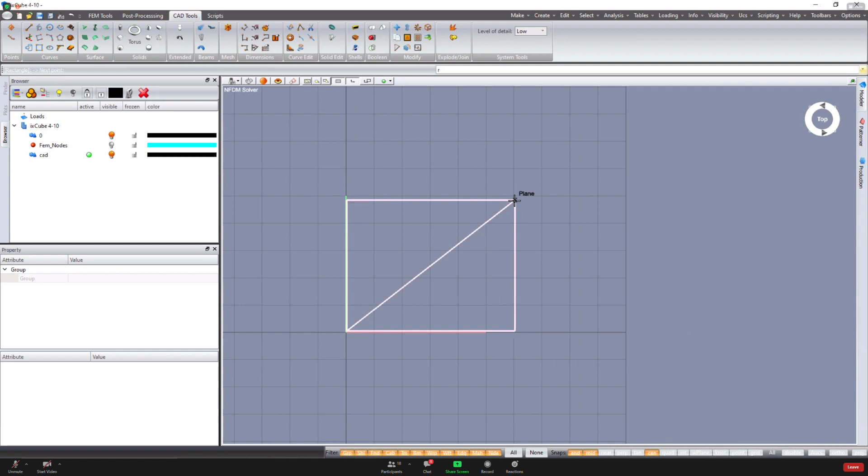From corners, I just click somewhere here, and then if you want exact dimensions, you can input here in the prompt, for relative, let's say 10,10. So we have made the square 10 meters by 10 meters. Now I want to fill this with a mesh. So you select this square. In the FEM tools, we have this tool here called Swan Merge.

Swan Merge wants a number of boundary polylines or boundary lines, and working in the current UCS plane, so I am looking from top, he will fill it with a mesh. So we call Swan Merge. It's asking me the size of the mesh. So we have a mesh of 10 meters by 10 meters. One by one, we make a mesh 1 meter by 1 meter. You close with OK, and it generates this mesh here.

Now, maybe 1 meter by 1 meter is too big. So we could use the remesh tool if you want to change the mesh sizes. And I want it to be 0.3 by 0.3. So we have changed the mesh size. So we have just a flat mesh here. And now we want to generate an inflatable out of this mesh.

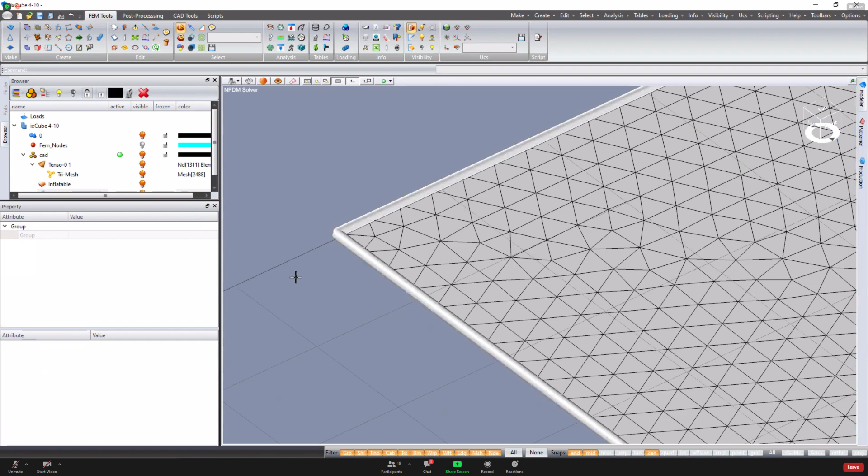Now, we double click on the edges. These edges are beam elements. They are linear behavior. And then we put them fixed. Fixed means I'm not really interested in the structural behavior. I just want to fix the membrane on these edges. You can input the cross section just to not let the software complain that they have no cross section. So we have generated the edges of this mesh. Now we want to inflate it.

Before inflating it, this is quite a big membrane. Later, I want to make a double layer, like a cushion. For this reason, I will double click on the membrane, and I am using now Ctrl+C to copy. So I have made a copy of this mesh. Okay. First of all, we want that this mesh, this membrane, becomes a layer of the inflatable. So you just drag and drop over the inflatable. You see now that the tensor group is child of this inflatable.

If we right click on the inflatable and we go into tensor params, we see that the inflatable has detected one chamber. And for this chamber, we have the pressure inside the chamber. In this case, it's 0.25. Remember that we are using kilonewtons and meters. So this is 0.25 kilonewtons per square meter. Okay, this is a pressure.

So, okay, let me save this. If you do not save your file, you will not be able to run form finding or analysis, for the simple reason that the software generates a number of scratch files, and he needs to know where to save these files. Okay, so we have saved it. Now we have an internal pressure inside this inflatable.

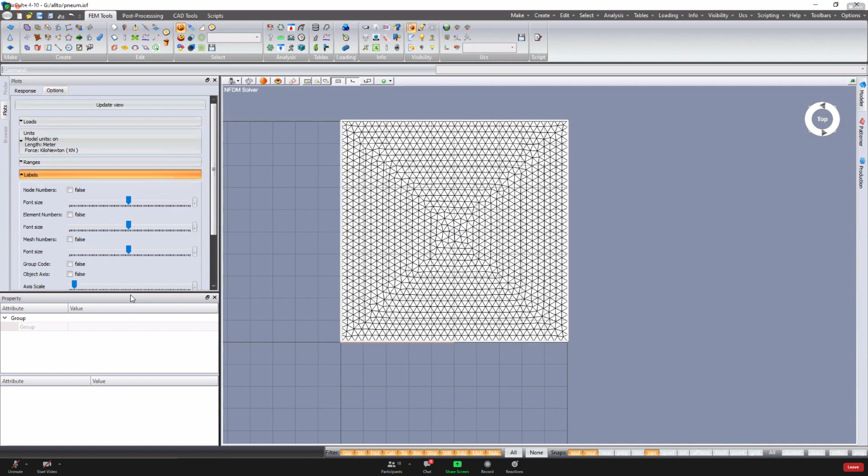Let's say that we want to see now which is the warp and weft plane. We want to check it. You can go into Plots, Options, Labels, and here we have the object axis. Activating the object axis, let's make them smaller. Okay, you see these axes here, and we see 3 arrows, one red, one green, and one blue. It's easy to remember: RGB is the color for monitors. Red, green, blue, RGB, X, Y, Z, warp, weft, and normal vector. So red is the warp direction, green is the weft direction. And we see that we have assigned that this is warp and this is weft.

Okay, let's save. We are ready now, let me take off this. We can just recall the form finder. You see here that we have 2 form finding tools. One is called Form Find, and one is called Form Find Stiff. We will see the difference of these two in a few minutes. I will recall Form Find Stiff. It is asking me how many steps I want to run. 5 is okay. You just run 5 and say okay.

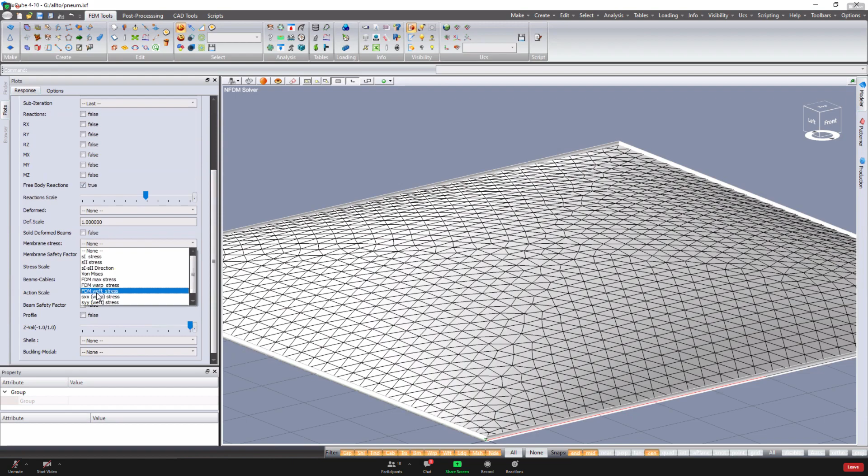And you see that the membrane has been inflated. Let's give a look in shaded mode. We see that it's inflated. And if we go into response, form finding, and we activate the membrane stresses for the warp direction, we don't see anything because the mesh is visible. You go in wireframe and you see the stresses in the membrane. Clearly, what we see is 3 kilonewtons per meter because we have set up that the mesh has a 3 kilonewtons per meter pre-stress. The same if we choose the Y stresses, again, a 3 kilonewtons per meter pre-stress on the membrane.

Okay. Jerry, can you maybe explain a bit, because you mentioned it's 0.25 kilonewton per square meter of internal pressure that you chose. Yes. And now you selected, instead of 1 and 1 for warp and weft, 3 and 3. So how do you select, and what is internal pressure? How much is needed for a cushion? I think this is important information for the students. Exactly. With inflatables,

I'm searching for the draw tools. So, okay, if this is an inflatable, a balloon. Oh, there is the arrow here. This is the internal pressure P. In any point of the inflatable, we have this pressure that is pushing the surface. Then in any point, let me change color here, in the membrane we have the pre-stress of the membrane. These vectors at each point, the pre-stress is tangent to the surface of the membrane. And this is the pre-stress of the membrane.

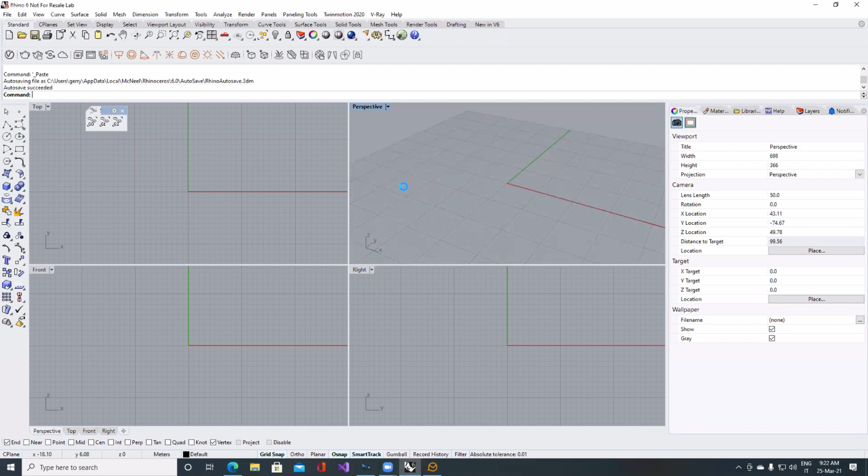Okay. I would like to measure the radius of this. I will get this mesh, Control C, Control V, and I'm in Rhino. Remember that if you're using Rhino 7, you have to go here, File, Export, CAD, and you choose here Rhino. It will save as a Rhino 6 file. If you're using Rhino 6, you can do a Control C and Control V.

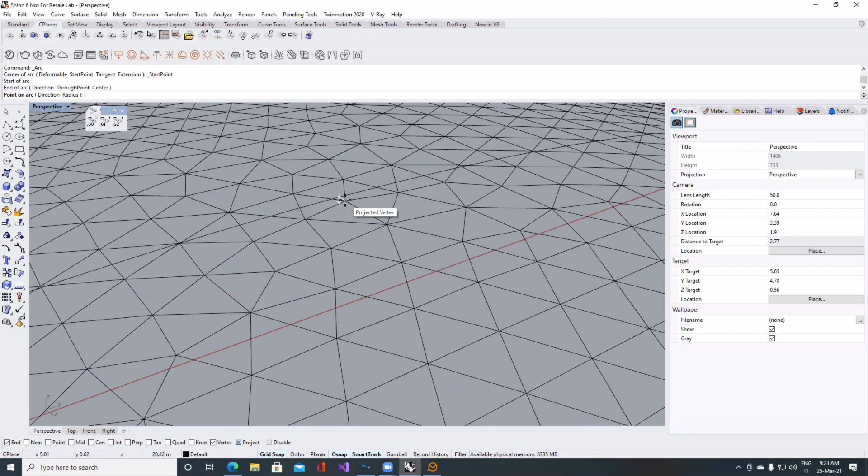I will join these. And now, we make a vertical plane, like that, and then we draw a circle from this point here, oh, no, sorry, an arc by 3 points, from this point here. This is an arc. If I go into the details, the radius is 20 meters. So 20 multiplied by 0.25, divided by 2, 2.5.

So I have calculated the pretension of the membrane, and it came out 2.5 because I used 20. It was a bit more than 20. Let's see. The radius is 20.42. So 20.42 is the radius. Multiplied by 0.25, the internal pressure, divided by 2 makes 2.55. There's something not really correct here, maybe I made a mistake.

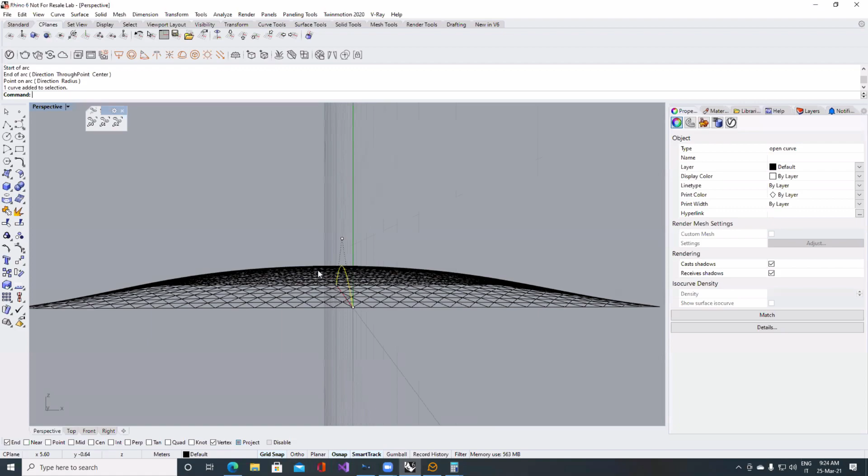.25 is okay. Maybe I didn't get the middle of this. Anyway, this is the formula. You can check it. This is a homework. You can check this if you do it correctly. Maybe I did not get exactly the center point of this. If you do it exactly, you should find that. No, sorry. Something that I forgot to say.

Again, the number of the pre-stress that we find depends, if you remember, on the number of iterations. So the more iterations we make, the more accurate we will get to the pre-stress. So I have used 5 iterations. Maybe if I use 10 and I run again, say plots. No, it's always 3. So we just found out that this is the correct value. So we should find out that this should be exactly 3 kilonewtons per meter prestress.

Okay, maybe this can be a check, your homework, check that this is correct. Maybe it's just a kind of approximation because 2.5 is kind of 3. So maybe you need to increase your... Yeah, but between 2.5 and 3, it's a big difference. I think I made more a mistake on the radius. Yeah, it might. Yeah, looked like, yes. But if you do it correctly, you should find that the balance is perfect. Okay, let's go ahead in any case.

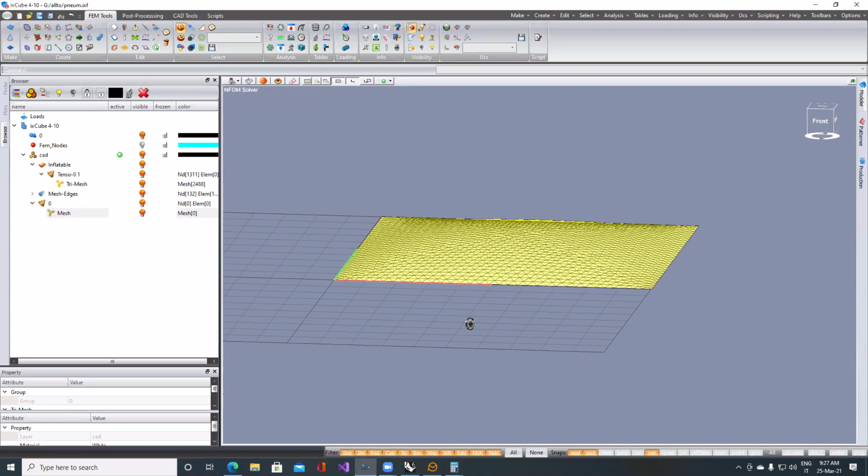Excuse me. I have a question. May I ask? Yes, sure, go ahead. I'm curious about the pressure number from the corner to the top of the shape. Shouldn't it differ from the corners to the center of the shape, or should it be equal in all parts?

This is what the software solved. If we look at the prestress, you see that there is very slightly, when you see these different colors, it means that these are not really the same. I mean, they're different at a certain point, but almost it's a constant pressure. The software has found out this. This is a minimal surface, a soap bubble. And the reason why we use these form finding methods is to find out a shape where the prestress is exactly, in this case, constant, so a minimal surface. Okay.

We see these slightly different colors, but since we are reading here 3.000, it means that here the value is not really 3.000, it's 3.00006 or something like that. That's why we see these slightly different colors. But here it's completely green. Yes. Thank you.

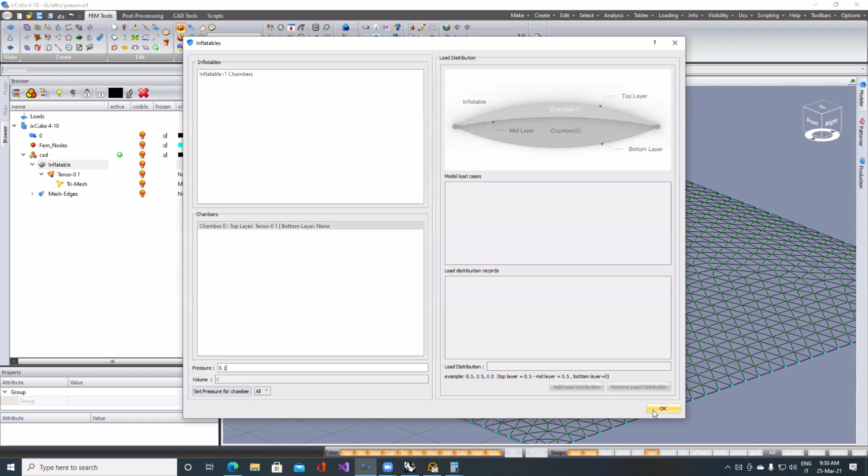So I need to copy something different. But we can do this. Look, I will make a trick. I will make a copy of this membrane, Ctrl+C. Now I am doing this for making a cushion. I will go into an inflatable and I will change the pretension to 0.1 and run the form finder. So you see, now it's flat.

Now, if I do Ctrl+V and I put my Tenso-Group inside, now I have 2 layers. They do not collapse anymore because I have moved the previous one. So now we have 2 layers. I will call this one here the bottom layer. And the new layer, I will call it the top layer. And I will just drag it inside the inflatable.

Now, if we go inside the inflatable, we see that they are not correct. The order of the layers has to go from the top to the bottom. So I get this one and drag it over the bottom, and we have inflatable top layer, bottom layer. Now, if I double click on the top layer, let's change the color to red so I understand.

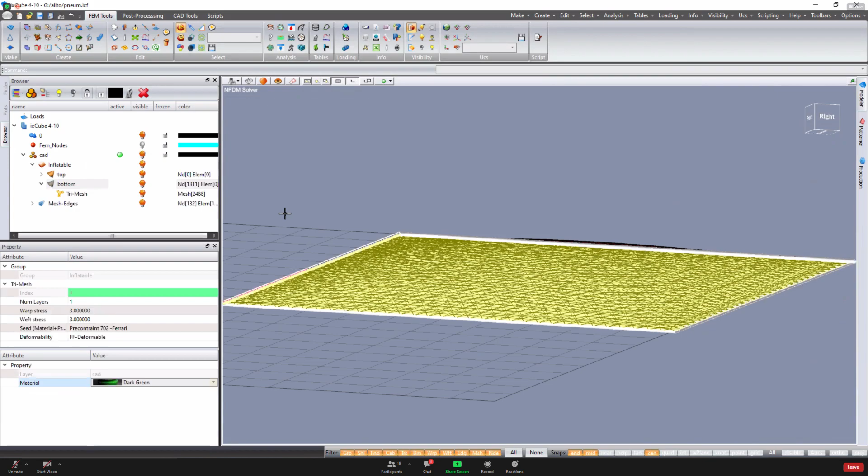I click on the bottom layer and I change the color to green. So, okay, I see that the top layer is red and I see it red from the top. But if I click on the bottom layer, it is transparent. When we see a mesh transparent, it means that this is the negative side of the mesh. A mesh has two sides, a positive side and a negative side. The positive side, you see it in the color. The negative side, you see it transparent.

So we need to flip the bottom mesh upside down. So I select it. Then here we have a tool, flip. I recall flip. Now I see it green. So red and green. Okay. I click on the mesh. This is 3x3 with a Precontraint. So that was the previous layer. Let's click on the top layer, and I will set this again. Precontraint. I will leave the pretension to 1x1.

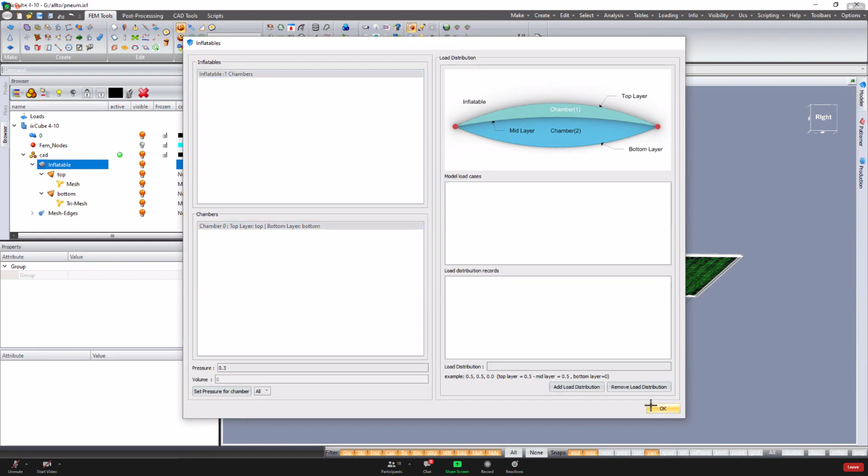Let's go to the inflatable now. Now the inflatable has one chamber, and the chamber is made out by the top layer and the bottom layer with a pretension of 0. Let's put 0.3. We run the form finder. That's it. Clearly, we see here that the bottom layer has a prestress of 3 kilonewtons per meter. So the curvature is quite lower than the top one, where we have set up a prestress of 1 kilonewton per meter. Okay.

So quite an ugly cushion, but this is how you can manage to change the curvature of one layer compared to the other one. Now let me change this to 2, and we run the form finder again. Okay, so this is a quite huge ETFE cushion. Clearly, if you want, you can add layers. If we want to add a middle layer, we can add a new layer.

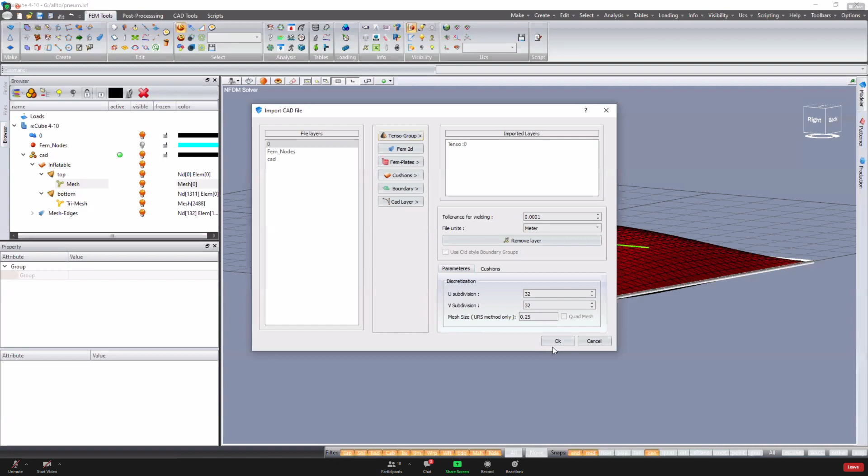Let's give it a try. If I Control V, we have the mesh inside 0, and I input it as a Tenso-Group. Okay. I will set this as the middle layer. If I run a form finding, clearly the middle layer is not inside the inflatable. So if I hide the inflatable, my middle layer is completely flat. No, that's why I run a form finding.

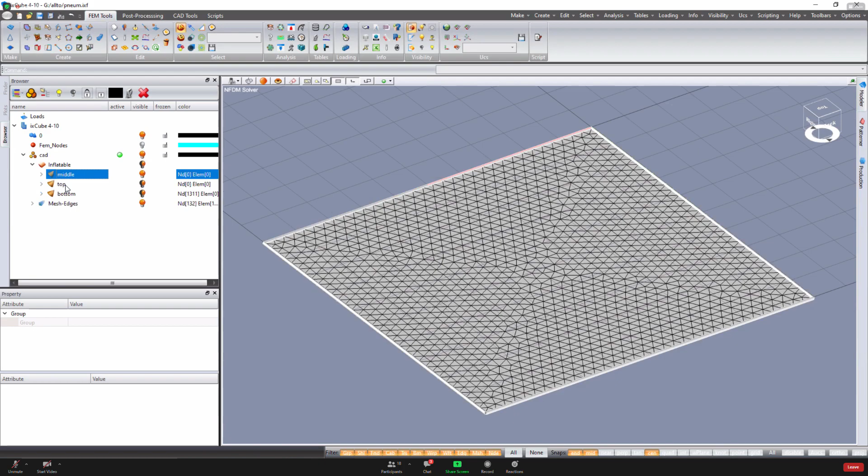Remember that for the internal pressure, only the inflatable applies pressure to the meshes. This mesh here, the one that I call middle, is outside the inflatable. So it has no pressure. Running the form finding, it just became flat. So it's a completely flat membrane because it has a pretension. Now I want to put this middle layer under the top layer. So I just drag it over the top layer. Like that. Okay. And now we have the inflatable, the top layer, the middle layer, and the bottom layer.

If we go into the params now, we see that we have 2 chambers. The top chamber, number 0: top layer is top, bottom layer is middle. Chamber number 1, the top layer is middle, and the bottom layer is bottom. Now, for the top layer, I input a prestress of 0.25 kilonewtons per meter. And for the bottom layer, I input a pre-stress of 0.35 kilonewtons per meter. Okay. So the bottom layer, this one here, we have input 0.35, and the top layer, this one here, 0.25.

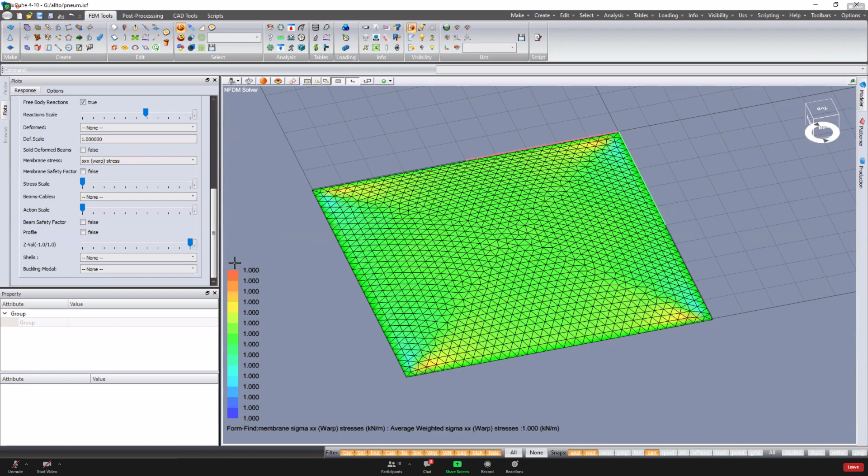We run the form finder. And we see that this is the middle layer. If I unhide everything here, we have 3 layers. If I hide the top layer, I can see the middle layer. And if I hide the bottom layer, let's give a look at the pre-stresses. So clearly, this is the middle layer, and it has a 1 kilonewton per meter pre-stress.

If I unhide the top layer and update view, the top layer, you see, it's 2 kilonewtons per meter. This is the middle layer. And then if we unhide the bottom layer, the bottom layer has 3 kilonewtons per meter. Yeah.

So this is generally how you never make an ETFE cushion: so big. This is 10 meters by 10 meters. Generally, there is a limit of 3 meters width. So if this should be a cushion, it will be 3 meters. You can make it 10 meters long, but the width should be not bigger than 2.5, 3 meters. Because generally for ETFE membrane, there's a limit in the pre-stress of 40 megapascal.

In this case, for ETFE, we use megapascal and not kilonewtons per meter anymore, because ETFE is not a woven material. And if you want to do this, you can go here into options and say, I want to see engineering stresses. In this case, if you set millimeters and Newton, these are megapascal. So Newton per square millimeter is equal to a megapascal.

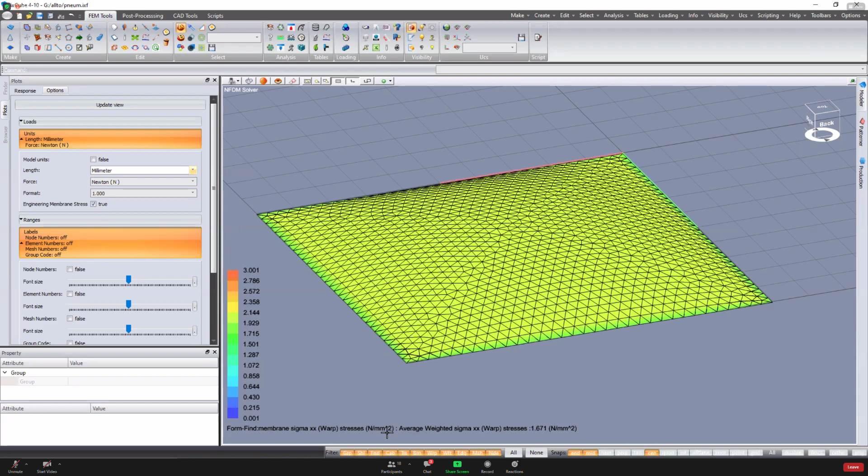So if you're reading a paper where you see megapascal as a pre-stress, you could choose this option, and you can see that we have 3 megapascal and 0.2 megapascal. Okay. Any questions? It's a bit tricky if you want to make an inflatable.

One thing that you should remember is the inflatable group, layers of the inflatable. The orientation of the layers is always facing on the top. So the top layer has to face outwards, and all the inner layers have to face in the direction of the top layer. The only one, the bottom layer, has to face outside. So the only one that is inverted is the bottom layer. The reason for this is that the software needs to know how to apply the internal pressure.

Okay. Hey, I just have one question. Can you hear me? Yes. So if you would have, say, a square base that would hold the cushion, however, the cushion fabric wouldn't be square, but would be several pieces sewed together, how would you proceed to find the shape that it would take under pressure? I'm thinking, for instance, of a sailboat.

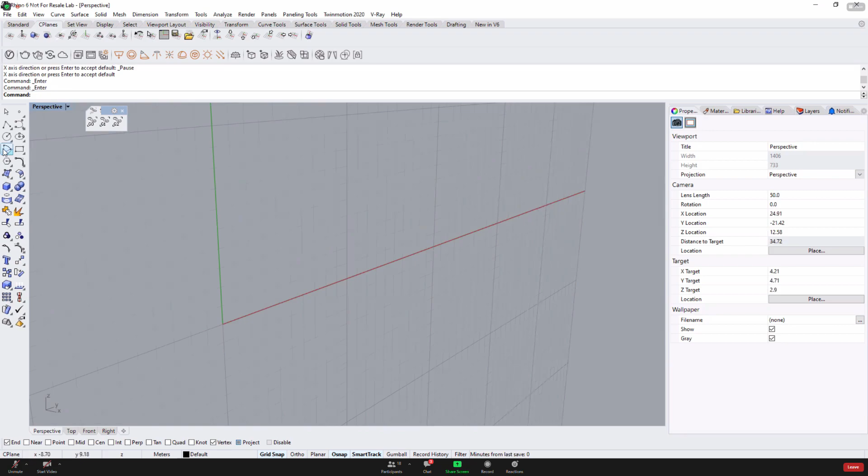Let's go in Rhino here. And let's make an inflated arch. So I will make a vertical plane, and I will draw an arch like that, and then go from top. Then I will copy this, let's say 3 meters. And now I will close it like that. So I want to make an inflatable over this one.

I get this, Control C, Control V, CAD layer, and here I am. Now I want to fill this with a membrane. I'll select everything. Remember, Swan merge. Let's make 0.25. So we have filled this membrane with the mesh. Remember that we need the edges. If I click on default, I will delete these. I don't need them anymore. Let's make the edges of this membrane with this one.

Apply. Can I interrupt you for one second? Yes. So my question, if we take this example: what if the base starting surface is not a straight loft between arch 1 and arch 2, but the surface is already bigger than the straight loft would be? So there is already some kind of sagging happening, and the sagging would then be taken care of by the pressure applied to that membrane. So you wouldn't start from a straight line.

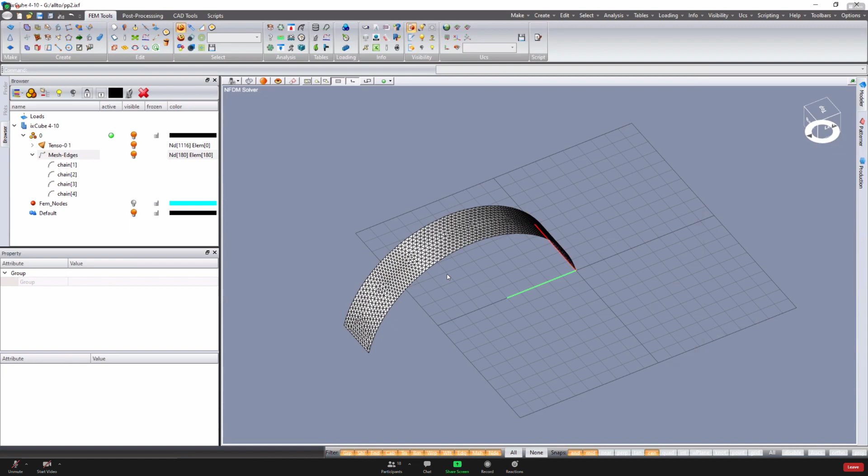It doesn't matter really. I think I understand your question, if I may. There's two things. The first one is, he inflates it, and it's kind of like a stretch material, like what you see. And later you do a cutting pattern to generate the 3D shape. Okay. Yes. Great. So I think I understood then. You cut the pieces so that in the end you receive the shape that you designed and simulated. So you can imagine the mesh as a slightly stretch material. Somehow, yes.

But for the form finding. However, the ETFE is not stretchable. So that's why you design it, and I'm sure that Jerry will show later how to do the cutting pattern. I think this was more your question. Yes, exactly. Thanks. You're welcome. So I didn't understand the question. No, I was thinking that I can start also with a deformed shape.

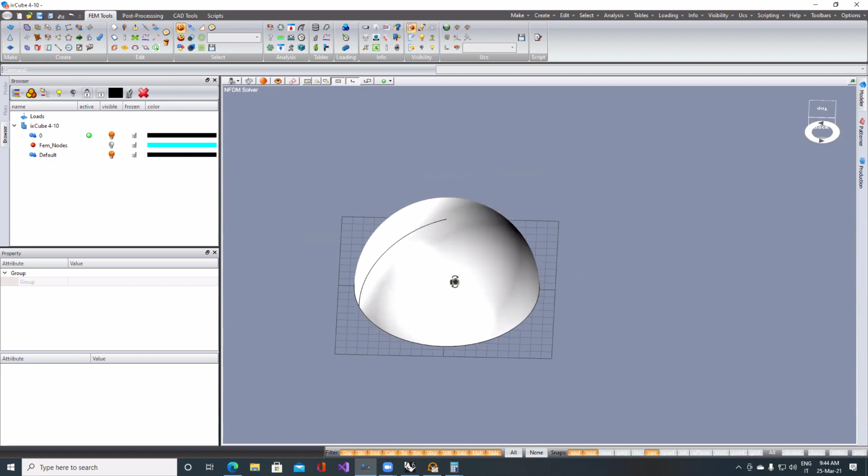Let's say that I want to use this dome here. With inflatables, there's a problem. I have this dome. We have seen what happens when running the form finding over an inflatable. Remember that we have the equilibrium formula, no? The equilibrium formula says, oh, let's make something different.

The equilibrium formula that I showed is the equilibrium between the pressure, the geometry, and the membrane prestress. Okay, so we have a formula that relates the geometry, the curvature, the radius, the pretension in the membrane, and the internal pressure. Now, what happens if I want to make something like this? This is interesting, it happens quite often in reality.

Let's say that I want this shape to be inflatable. This happens in reality. The customer comes and says, look, I want this shape here. Where is the problem? If I run the form finding, it's very difficult to find. Now, this is simple because it's a radius, but think of something more complex. I need to find the correct relationship between pre-stress, internal pressure, and geometry, because they're all related.

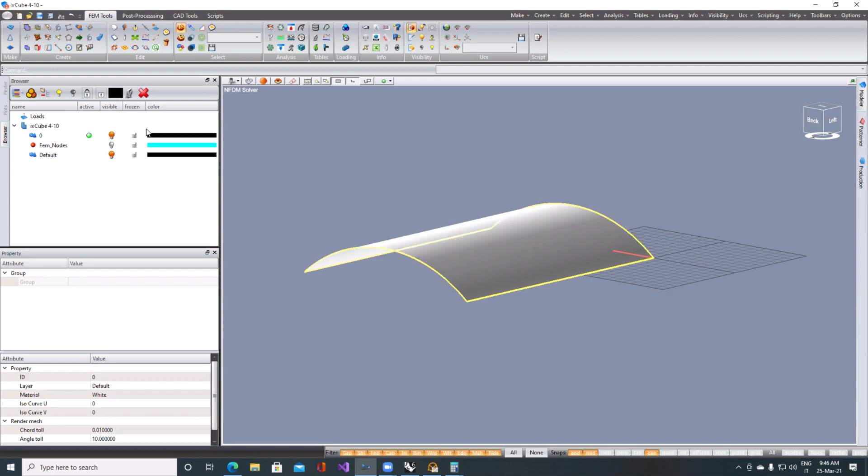What we can do is this. Out of this shape, I can generate a mesh. I go here and generate a new group. This is a surface, and I can say generate a mesh out of this surface. Okay. So I have generated my mesh. I don't need the surface anymore. And now again, we add an inflatable, and we put the membrane inside the inflatable.

Oh, I need the edges, so generate edges. I set these edges again to be beam, linear, fixed, just to fix the edges. Now I want to run the form finding, but I don't want to change the shape. Let's say that we have in the params 0.25 pressure. Okay.

If I select the mesh and choose the material, instead of form find deformable, we can set it to be stiff deformable. When we use stiff deformable, we are telling the software, look, I don't want to find the shape. I just want to find the equilibrium between the internal pressure and the pre-stress. So here we should set the amount of pre-stress near the real values. I don't know the real values, but we could calculate them because we know the radius and the pressure.

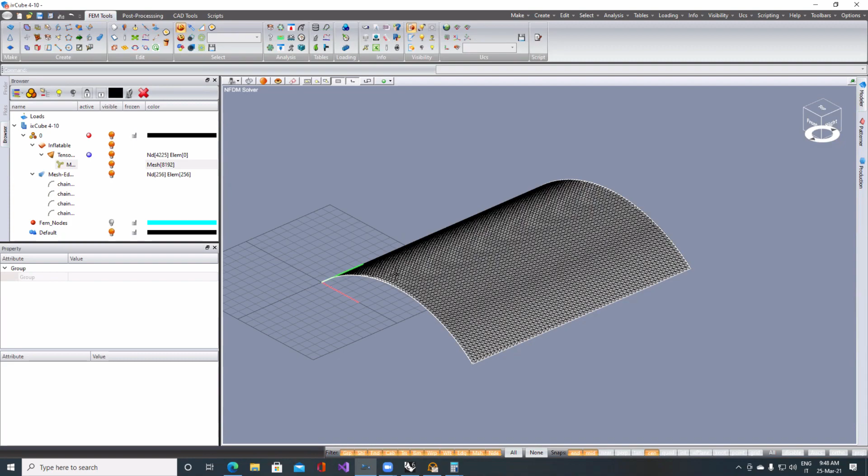I will just put 4 and 4 here. I'm just guessing at this moment. Let's put the warp direction in this direction here. Okay. Now, we are using a so-called stiff form finder, or at least we are using the analysis. When we run the analysis, we're not really doing a form finding. We are doing an analysis of the internal pressure and the pre-stress in the membrane. Let me save.

And let's see what happens when we run the form finder. You see that the options have changed. It's not asking me anymore how many iterations. It's asking me the accuracy of the analysis. I will start with 25, and later I will explain all these parameters. But now it's doing another thing: a structural analysis, because we are balancing the internal pressure with the pre-stress in the membrane.

But now the geometry will not change so much because we are doing an analysis with the real membrane, and we can see the final shape here. If I go into response, form finding, and the final shape, I get the deformed shape. And this is the real final shape. You see that we have displacements of 8 millimeters, the red. So the shape has changed slightly

to balance. But if we look at the pre-stresses, these are the stresses in the membrane. You see that here we have blue, 3.86 in the warp direction. And here we have 3.90 in the weft direction.

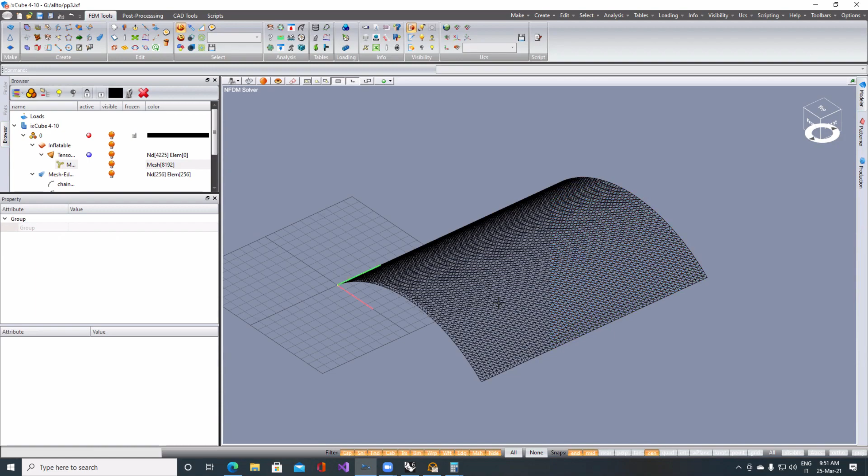Yeah. Now it has not changed for a simple reason. Why has it not changed in the shape? Because of the pre-stress. You remember that I have set the pre-stress here 4 by 4, but after running the structural analysis, the software has calculated the real pre-stress for me.

If I don't know which is the final pre-stress, and I put 1 and I run the form finding here using the geometrical form finder, the balancing form finder, this is what happens. So you see the shape has completely changed because the balance between the membrane pre-stress and the internal pressure wasn't, I mean, I have put it without calculating it. So it became a balloon. Okay.

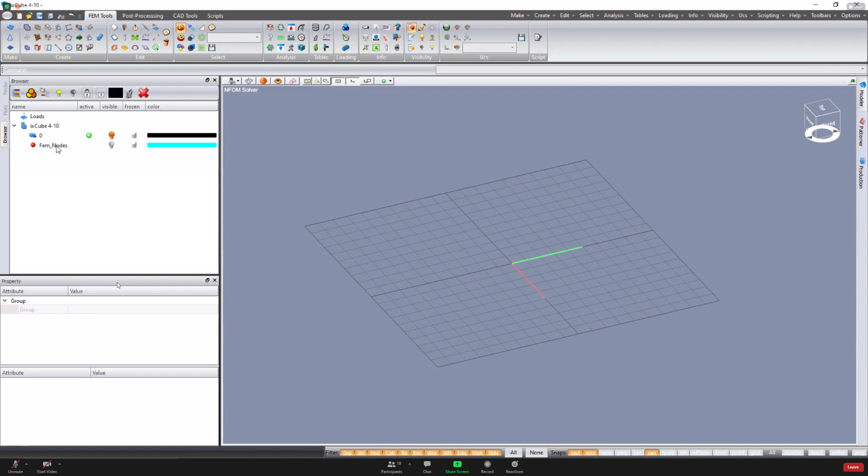Okay. Let's start a different topic. You remember that the most important thing when we are generating a tensile structure, at least inside this software here, is the difference between stiff deformable and form find deformable. Why do we have these two options?

Let's say that we want to generate. Let me go back to Rhino here, and we want to generate a hypar with the steel now. We want to add to the hypar the supporting steel. So I will make again my base 10 meters by 10 meters. Remember the layers. So I go into my layers, and this is called base. Then I make a new layer, poles, cables. Okay.

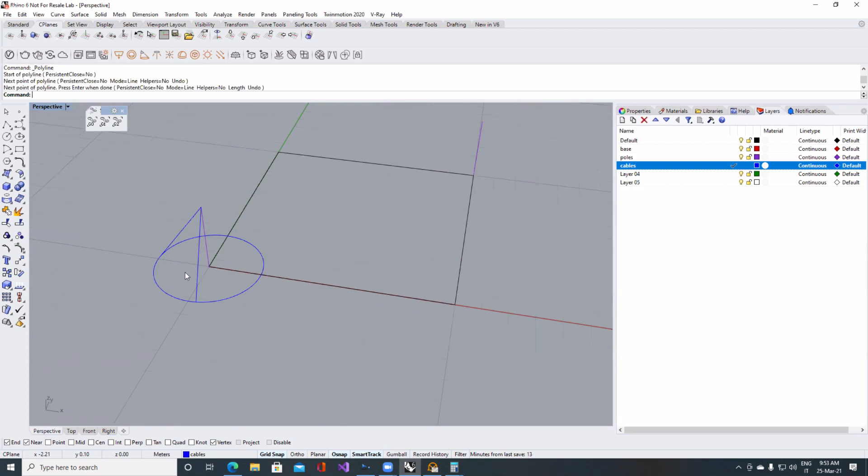Into the poles, I will draw a vertical pole here, 3 meters. And then I will copy it here. Then in the cables, I will draw 2 stay cables here. Okay. And I will copy them here. And then let's make another one, links, so I can show you how to make also fixed links. 0.5.

Okay. And this one here is boundary. So what we want to do, we want to design this hypar. Okay. Let me draw the boundary. We want to draw this hypar. And we want to have these 2 turnbuckles here, 50 centimeters long, and a pole with 2 stay cables on these ends here.

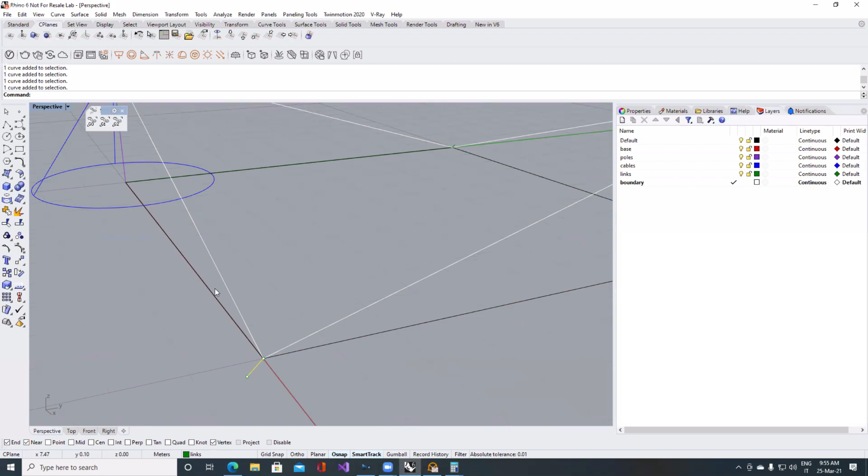The first thing that we have to do, at least for beginners, is to generate the membrane. Now, if we look at this tensile structure, what part of this tensile structure is unknown from a geometrical point of view? Well, the membrane, I don't know the shape of the final membrane, and I don't know the shape of these turnbuckles, the direction of these turnbuckles, because they follow the reaction force in this point.

So these elements and the membrane will be flagged as form find deformable for the simple reason that I want to find the shape of these elements. If we look at the pole and the cables here, there's nothing to define here. The geometry is defined by me. I have designed the pole, the vertical mast, and the two stay cables, no? So you can think of this as a constraint on this point.

So these elements are stiff deformable. I don't want to find the shape of these elements. I know the shape of the elements. Clearly, they belong to the overall geometry, but I don't want them to go into the form finder. Let's get the boundary first of all. We import the boundary as a CAD layer.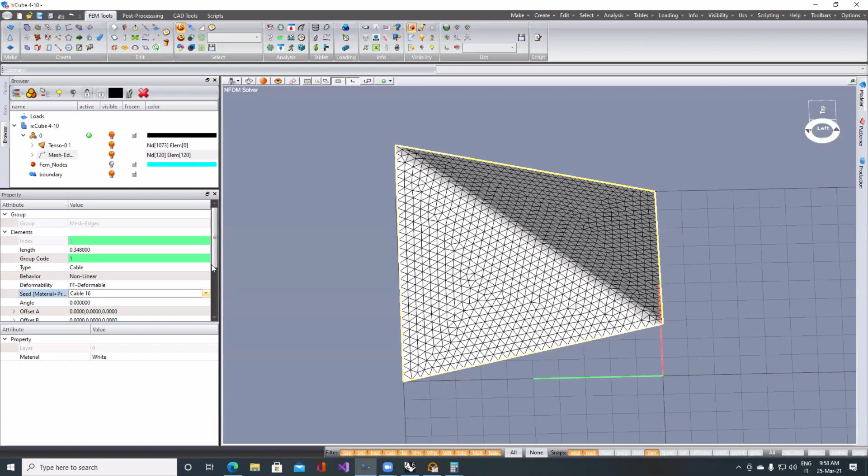And then we have to input the pretension of the cable. Clearly, the sag of the cable will be related to the pretension. I will put a 10 kilonewton pretension in the cable. I double click on the membrane. I want a prestress of 1 kilonewton per meter and a Precontraint Ferrari.

The last step, you remember, we have to set the warp and the weft direction for this membrane. In this case, if you remember the previous lesson, this is a hypar and the main stresses go at 45 degrees. So I go into the UCS x-axis. I click on this point here and then on this other one up here. And we have that the plane goes at 45 degrees. Right click on the mesh, warp weft mapping, and the XZ plane is the warp plane. Okay, let's save.

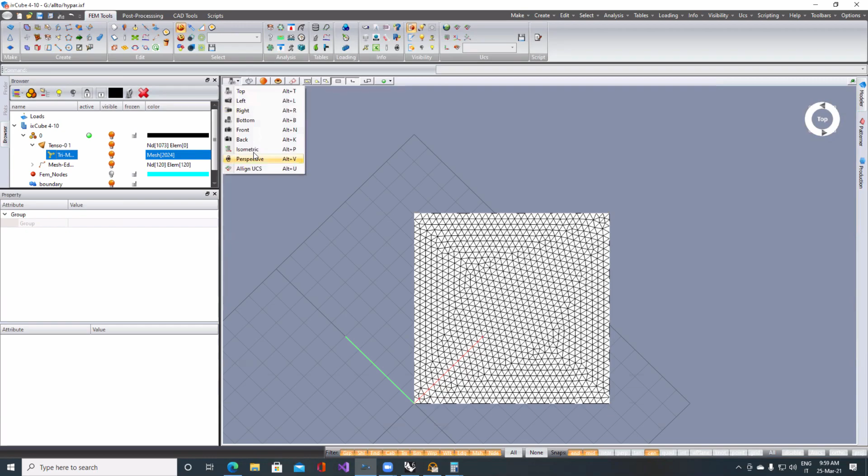Practically, we are doing again the hypar that we did in the first lesson. We can run the form finder. Remember that when you have no steel, you can run this stiff form finder. Form find stiff means every stiff element becomes fixed. So, error in form finding.

Error in form finding. Because I have set no restraints, you see all the nodes are all green. They're all free. So clearly there are no points fixed, so the membrane has no way to find the shape. We need to fix some points. In this case, I will select the 4 corner points and we will fix them. Run the form finder again, and we have the shape.

So if you're happy with this geometry, we can go ahead and add the steel. If you're not happy, for example, the sag of this cable is too big, before adding the steel, it's better to find the correct shape. I will add 20 kilonewtons for these cables and run the form finding again. Okay, so now the sag is smaller and I prefer this shape here.

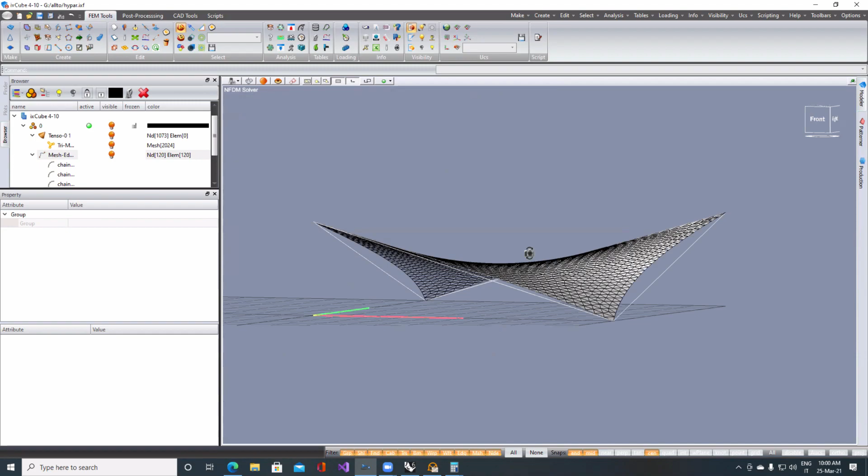What I want to do is to add the links. If I go here and I select, I will do it one step at a time, but clearly, when you get a bit more experience, you can do everything in one step. I want to add these links. Control C, Control V. I will add them into a FEM1D group. Remember, a FEM1D group means any line becomes a structural element. And I have these links here.

Now, if we look in wireframe mode and we activate the nodes, clearly this node that has been restrained is not restrained anymore. So I select the two restrained nodes, and these have to become free. The two end nodes of the links now have to become fixed. Okay, we have added these links.

But if I click on the links, we have to set the properties. These are cable or truss. I will set it to cable. They are nonlinear. They are form-find deformable. I want to find the shape, I want to find the orientation of these links. I will put them as a cable 16. But now there's another option that we have to set. We want to constrain the length of these elements. I don't want the length of these elements to change.

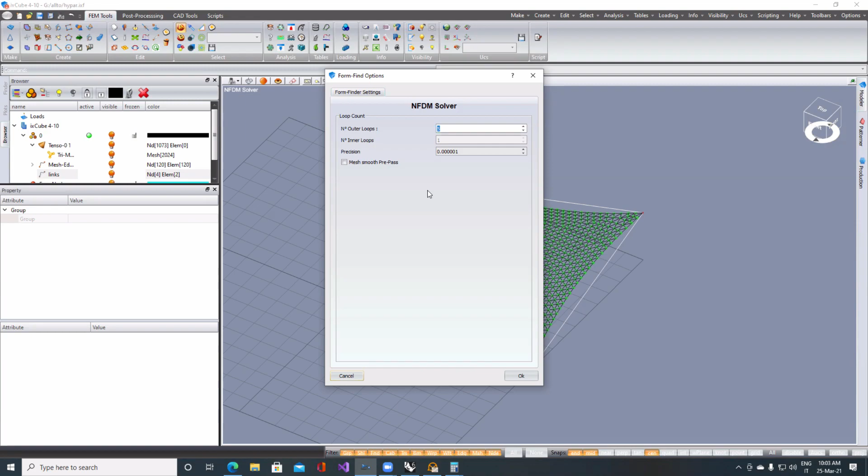It's not able to find it because, if we go here, the initial pre-stress is 0. Clearly, the software, in this case, in the first step is using the current pre-stress of the link. The current pre-stress is 0, so this link practically has collapsed. We have to put here, I don't know, 10 kilonewtons as an initial pre-stress. Let's run the form finder again. Okay.

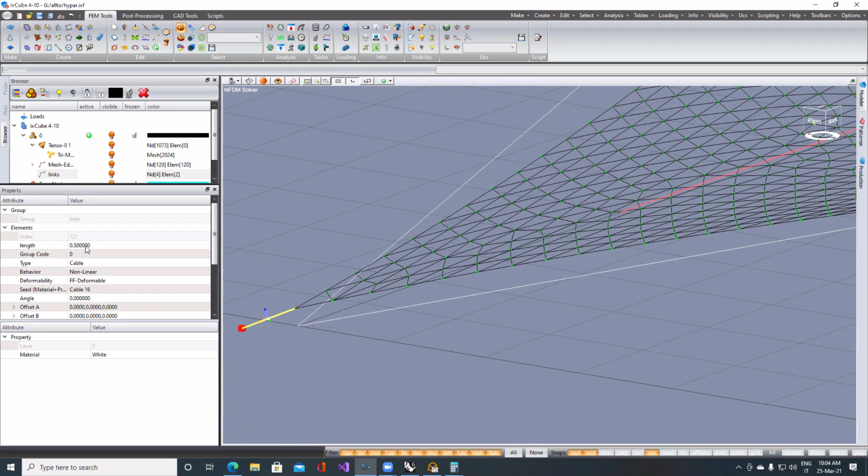If I click on this link, it's telling me here the actual length, 0.5 meters. And you see that the direction of the link follows the direction of the membrane. Okay. Now we have added...

Sorry. Two technical questions. Yes. The first one, does the software automatically recognize that it's linked? Your turnbuckle, you just copy-pasted it, but you did not attach it to the membrane. Does the software immediately recognize that these two things are connected? Yes, exactly. This is a general rule of the software.

All the groups here, you see that we are generating, have what we call a node pool. They have their own nodes. In options, preferences, when two nodes are inside the welding tolerance, in this case it's 1 millimeter, they are merged into one node.

So in this case, the link and the membrane share this node; they are exactly in the same position. So when we run the form finding or the analysis, the software checks the node positions. All the nodes that are inside the tolerance of 1 millimeter become one node, and all the elements are attached to that node.

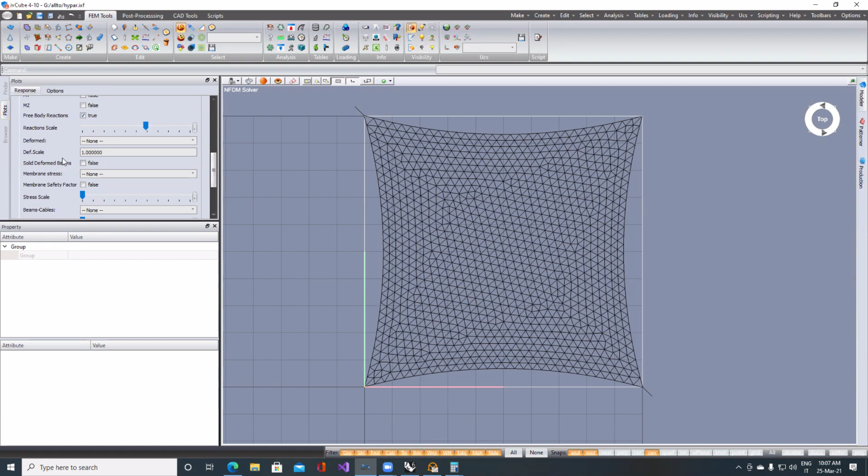I lost you here. I mean, here we have said that this is the warp direction. When you do this, what happens? We have set a plane, a vertical plane, going from this point to this point upwards. The software gets this plane and cuts all these triangles with this plane. So each triangle is cut with a plane parallel to that one. Now, I get a plane parallel to that warp weft plane. It goes through this triangle, and the intersection between the plane and the triangle defines the warp axis.

Okay, we have a plane and a triangle. The intersection between these two defines the warp direction. The triangle has a normal vector. The cross product between the normal vector and the warp direction defines the weft direction. So the warp and the weft are always at 90 degrees. So what we see here as a mesh is not representing warp and weft? No. That answers the question.

To see warp and weft, you have to go here and you have to look at the axis. This is warp and this is weft: red, green, warp, weft. You see here, all the red arrows are pointing in that direction. Okay. So warp and weft. Okay, thanks. You're welcome.

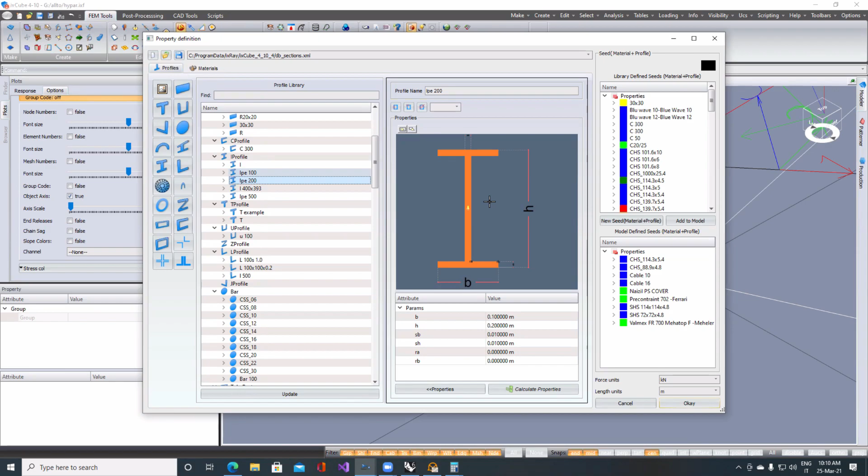And for axis number 2 and axis number 3, if I go here and choose, for example, in the profiles, an I profile, the X-axis of the I profile will become axis number 2, and the Y-axis will become axis number 3. So let's put this I profile. Maybe I have it already here. Yeah. I select this element. Remember that this is axis number 2 and axis number 3. I change the cross section to be the I profile.

If we look at 3D now, let's zoom and change the color. You see that for the I profile, axis number 2 is the x-axis of the profile, and axis number 3 is the y-axis of the profile. So when you generate beam elements and you know how you want to place the beam element in space, you should remember that axes 2 and 3 define the position of the cross section.

And here, in the properties, we have the angle. You can rotate it here, for example, 45 degrees. This is a rotation around its local axis, you see. If I select it again, I rotate it 90 degrees. We are rotating around its local axis, so we can set the direction of the stiffness where we want.

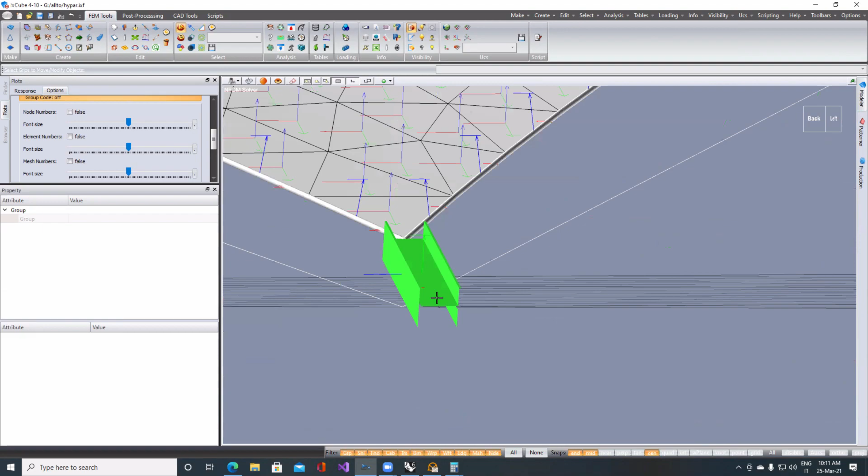Let's turn it back to the cable. I take off the axis. Okay, so we have added the two links. What we want to do now is to add the mast and the cables. So we will select these, Control C, Control V, and the cables FEM2D, the poles FEM2D.

Clearly, remember that in the previous form finding, we have fixed this node. This node now is not fixed anymore. It's not fixed anymore because we are going to link this node to this pole and cable, and the same on this side here. So we set it to 3, and the bottom nodes will be fixed. Okay.

The properties. Let's go to the cables. I select the cables. These are stay cables. I don't have to do any kind of form finding, so they are cable elements. They are nonlinear. They have a nonlinear behavior. They are stiff deformable now. These are real cables. We set up a cross section.

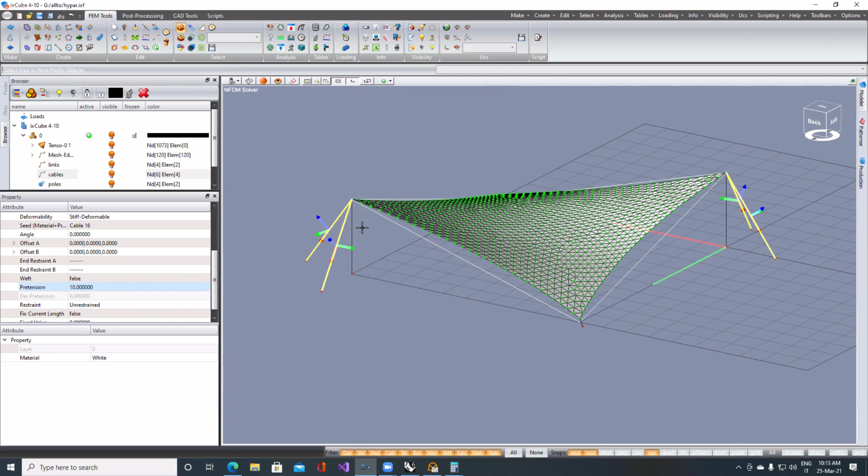Let's double click on the poles. The pole is a beam element. Remember that for beam elements, you should always use linear behavior. We have also a nonlinear behavior, but with nonlinear behavior the pole becomes very flexible, so it's better to use a linear behavior. They are stiff deformable again. The beam with the two cables are stiff deformable. And here I want a pole. This seems a bit small. No, it's okay. And we want a pole.

Now, there's one thing to say. Clearly, we want it to have a rotation on the bottom, or if you want, we want the beam, this mast, to be pinned at the bottom point. We don't want bending moments here. How can we do this? If you select the pole, you remember the axis direction, the red arrow. The red arrow tells me which is the first point and which is the second point. In this case, the arrow goes from bottom to top. So the bottom point is point A, and the top point is point B. The same for this one here. The red arrow goes from bottom to top.

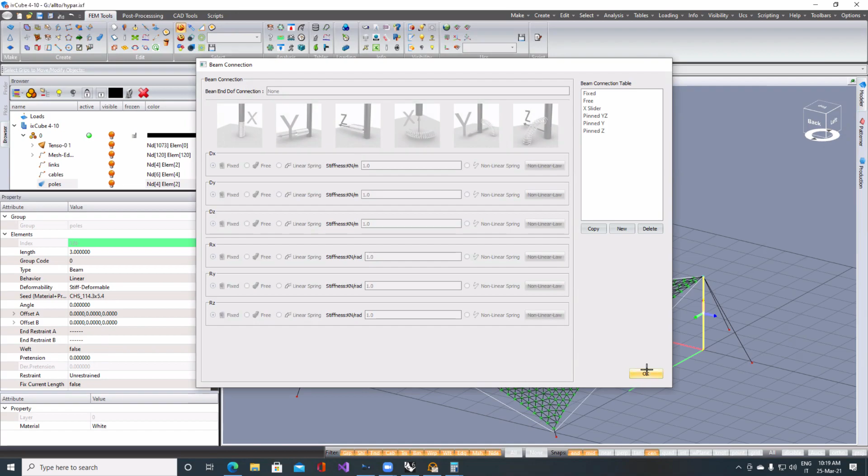We can change this behavior using these tables. You see, we can release one or more than one of these degrees of freedom. So basically, if we go back to these 2 poles, restraint A is the bottom point, and we want it to be pinned YZ. We want it to rotate around the green and the blue axis. They have to be free to rotate. Okay. Let's save.

And now we can run the form finder again. Now we can understand the difference between the stiff form finder and the normal form finder. If I run the stiff form finder, this one here, all the elements that have been flagged as stiff deformable will stay fixed. So it's like these elements will fix this node automatically. Basically, all the stiff elements are inactive. They just fix the membrane. And this is what we have done in the previous form finder.

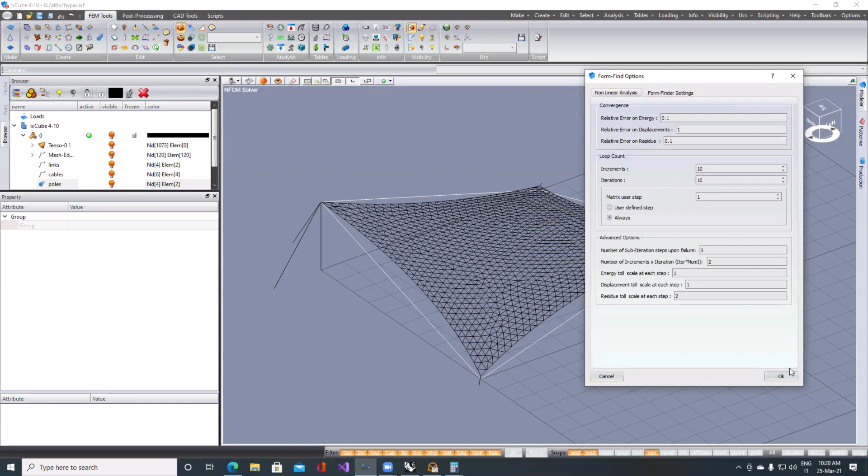Okay. If we use this other form finder, this form finder here is different. This form finder will take into account the membrane and the steel. You see, we have 2 options here: an option for the normal form finder, and an option for the Newton-Raphson analysis. Generally, you can leave these options as they are. If you have modeled the model correctly, the analysis will run and converge. So we have done the form finding. Clearly, nothing has changed. The shape has not changed.

But now, if we go into the plots, into the form finding response, first of all, we have the option to see the deformation. You see that the final shape is this deformed shape. The real shape, this point here, under the prestress of the membrane, has moved by 0.06 millimeters.

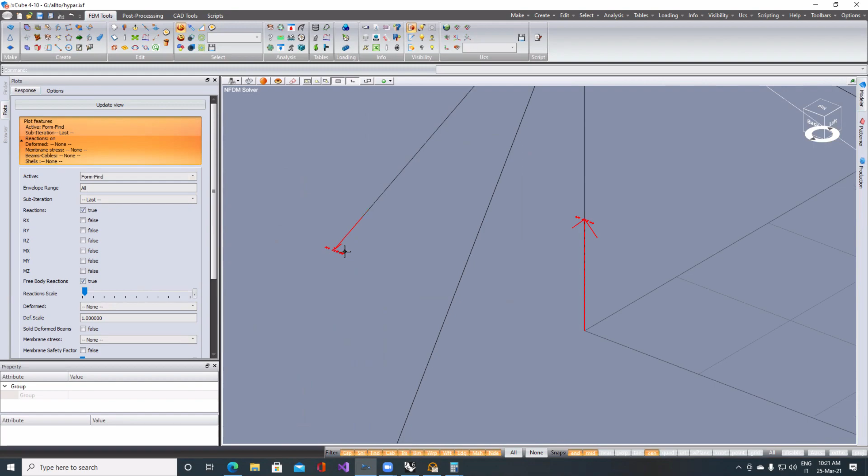If we look at the reaction forces, you see that the pole has a reaction force of 44 kilonewtons, and the cables have a reaction force of 22 kilonewtons. So now the forces are on the ground. Here we have 19 kilonewtons. And again, the prestress has changed.

If we look at the membrane prestress, we see that the prestress has slightly changed. Remember, it was 1 kilonewton per meter when we ran the stiff form finder. Now it went down to 0.72 here and 0.5 here. Why? Because this point has moved slightly. So the membrane has lost an amount of pretension.

Okay. Is that clear? We had a perfect pretension when these 2 points were totally fixed. Now, running the form finding with the steel, it has moved slightly, so the membrane has lost a small amount of pretension, and this energy is going into the poles and the cables.

And if we look at the cable, remember I have put in the cable a 10 kilonewton prestress. If I click on this cable, the real prestress is 24 kilonewtons. If I go here into the pretension, it's 10, but the real pretension is 24. Okay. The real pretension, we can look at it here: we go into the beam cables, axial forces. We see here that the pretension of this cable for the form finding step is 24 kilonewtons.

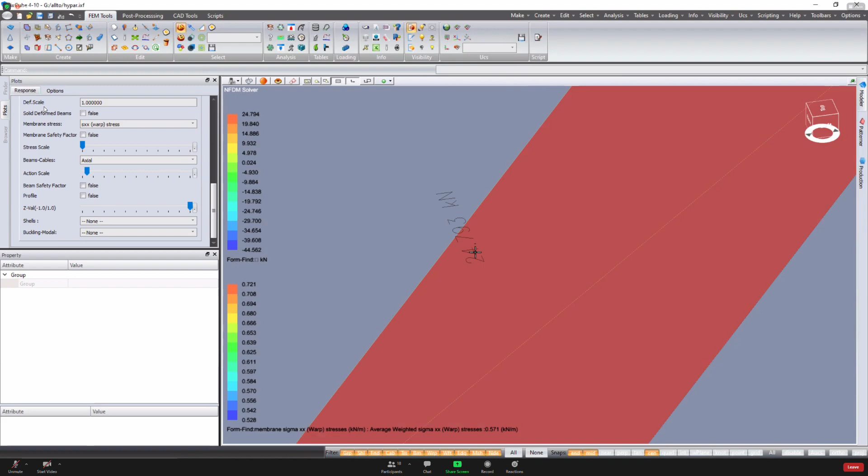Okay. So practically, if I have to build this, once we have made all the patterning and built the poles and the cables, we have to go to these cables, and with the device for pretensioning cables, we have to reach a pretension of 24 kilonewtons. Okay.

Any question? No. Yes. Got scared? Yeah, tell me.

Since the angle between the 2 edge cables of the membrane and the 2 suspension cables for the pole is not symmetric, the pole is not in the bisector of these 2. Oh yeah, I did not make them really symmetric. I made them a little. Yes, but what would happen if I would like to find a position where this is in balance? Can I use the form finding for this too?

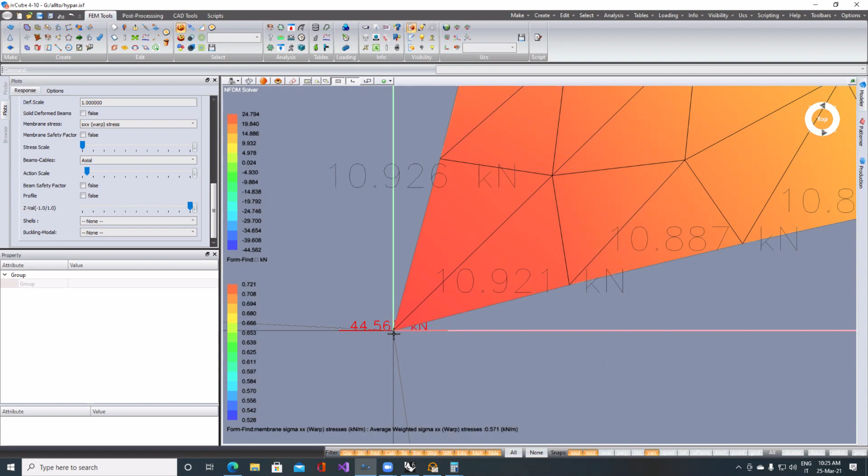So I'm saying that we started with a pinned column in a vertical position. But the column is not in the bisector of the membrane and the suspension cables. So the column is loaded a bit asymmetrically, so it's getting something like a moment, even though it's pinned. Can I find its position? It's getting a moment. No, if we look at the bending moments, it has no moment. You're talking about the optimal position. Look at the bending moments, it has no moment, this one.

Yeah, but it cannot be done directly because, yeah, finding the optimal position of the cables and the beam. I mean, it's not so difficult, but here you have a reaction force that depends on these cables, but more or less generally it's in the direction of the membrane here in the middle. So it's clear that if I have a single force, there are many different angles, but finding the perfect angle, maybe this post should be slanted here, going inwards.

The problem is, what is the best angle? I want to minimize the dimension of the cables. I want to minimize the area of the pole. I mean, we should define the goal to find the optimum. So in my experience, what really happens is that you have a lot of constraints on the ground. What happens in reality is not that you want to minimize this. You don't really save so much material generally.

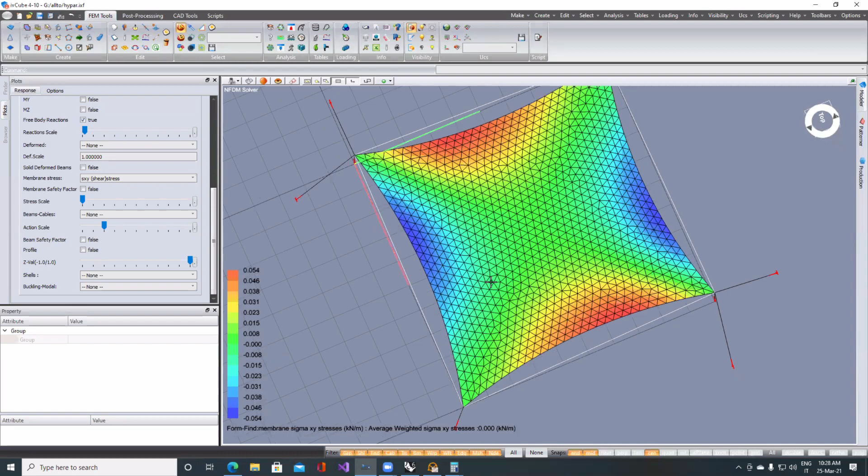So this is all clear. If we look at this, these are the shear stresses. And clearly they're not symmetric because I have designed these cables in an unsymmetric way. Okay. So I think everything is clear, I hope so at least, about merging a membrane and the steel part. We flagged the steel part as stiff, deformable. Okay. Stiff, deformable, and the membrane as form-finding, deformable.

What happens is that the software performs two steps. It runs the form-finding step first. After the form-finding step, here we have a reaction force. Then everything is merged into a single model, and a stiff analysis, a nonlinear analysis, is performed, where clearly we want everything in balance. And so we end up with reaction forces on the ground or in the fixed points. The membrane changes the pre-stress slightly, and we have our initial shape. From this shape, we can apply wind loads, snow loads, whatever we want, and run structural analysis. Okay.

One question. When you say non-linear, is it geometrically non-linear or materially? Both. When we run a nonlinear analysis, it's geometrical because we have large displacements. The membrane goes under large displacements. And then the behavior of the cables and the membrane is material nonlinear, because they go slack when they go in compression. So they have no stiffness for compression, only for tension. So geometrical non-linear and material non-linear. Okay, thanks. You're welcome.

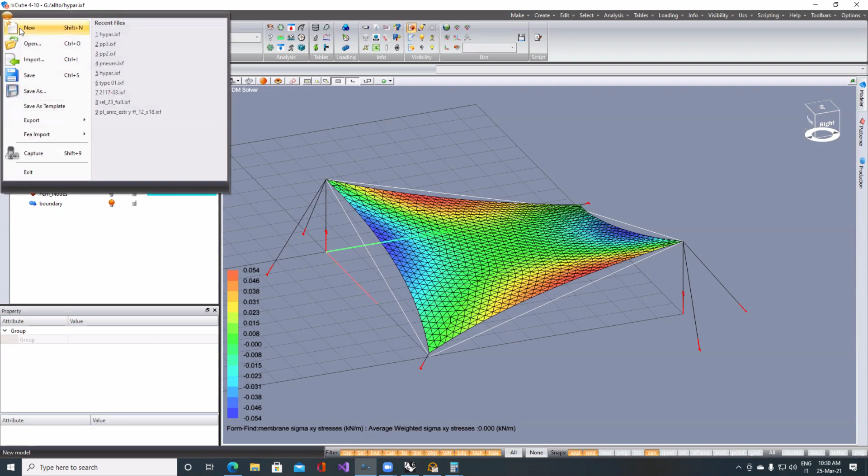Okay, if everything is clear, let's go to the next step. I want to remind you of something before going to the next step. Remember that the model is made out of layers and groups inside layers. If I make a new layer, I can call it mem. You can drag a group into a layer. I can make a new one, call it BM, and drag these into my BM.

If I want to make a copy of this structural part, remember that you can copy only groups. For example, if I hide my geometrical elements and select, then I go into the CAD tools and this is copy. When I call the copy command, it asks me to select objects. You cannot select FEM entities as a post-selection anymore, only as a pre-selection. So now I just right click and it asks me for the source and the destination. So I can make a copy of these. Okay.

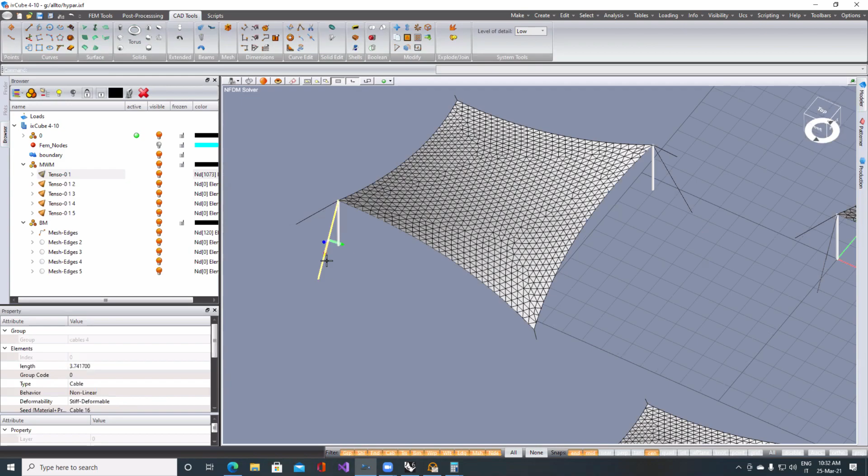And you see that all the groups and all the edges have been cloned. So even if you select only one element of a group, the whole group will be cloned. The same happens if you use rotate, scale, whatever. Okay. So we have groups. The organization of a model is made out of layers, groups, and each group has some subgroups. The Tenso group has a tree mesh subgroup, and so on. Nice. Let's go ahead.

What we do now, we want to design these tensile structures in a parametric way. I mean, I am lazy and I don't want to use the software. I don't want to use ixCube inside the software. We want to use Grasshopper. You know Grasshopper? Yes.

So if I load Grasshopper, first of all, when we want to use Grasshopper, you first have to run ixCube. Then you have to run Rhino with administrator rights. Run as administrator. If we don't run it as administrator, it will not work. So once we are inside Grasshopper, you will find the ixCube toolbar.

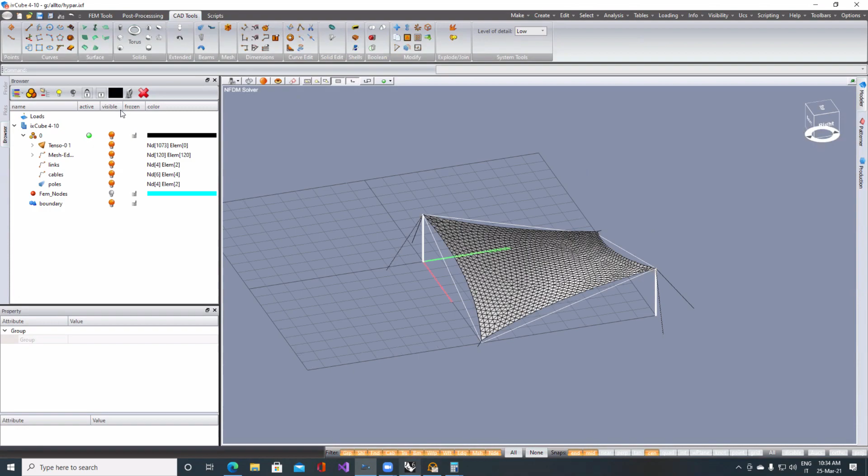The easiest tools to use are the get tools. If I go into the get tools, we can use the tool get group list. If we use the get group list tool, you see here what we see is the list of groups that we have generated. I go back to my ixCube. Then we have the get layers. These are the layers that we have generated.

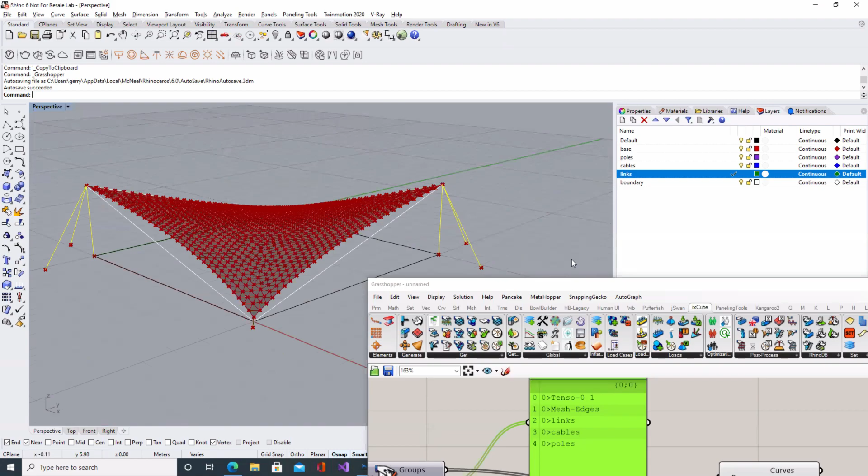Now, we have also the get group. If I connect the group, it wants the group name. So if I connect all the groups to this group name and I say update, here my membrane is inside Rhino now. The get groups has got the meshes from ixCube, the curves from ixCube, and all the information to these other node elements. So basically, I have got all the information out of ixCube.

Now, this is parsing geometrical information. There's a lot of information for your brains. What we have in these tools, we have the tools to generate information. Here we can generate information. Then we can get all the geometrical information and the properties of the elements. Then we can apply loads, we can generate loads, and then we can run analysis and post-process data. Okay. Let's start easy.

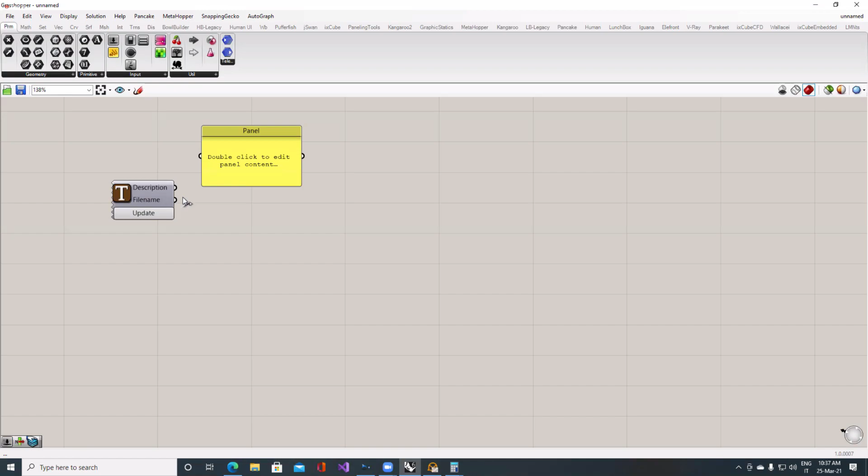We start making a new job. If we want to start making a new job, the first thing that I suggest is we go here into the global panel and we have templates. If we look at the templates, you remember these are the templates that we used when we started a new job. It's always a good thing to start with a template. For a simple reason: in the beginning you start simple, but if you go on and make really complex models, we want to be sure that we always start from the same point. And so starting with a template is always a good starting point. Clearly, you can make your own template if you want and start with it.

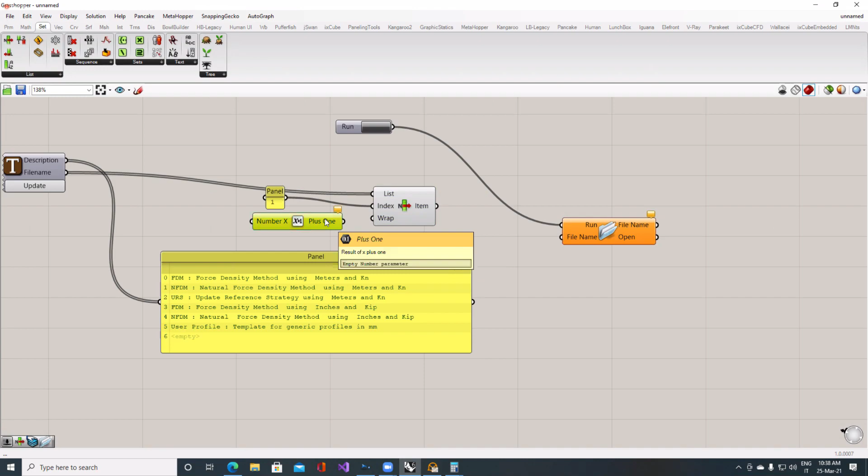So I want to get this template. We go into ixCube, and from the global, we recall the load file. Open file. We choose one of these templates. I want to start with template number 1. And then I want to save. So when I start like this, I'm sure that I am always starting from the same position.

Okay. When you save, this one here will save the file. You must be sure that the directory work exists. So I go into my C, and I make sure that I have a folder. A lot of folders here. A new folder, name it work. If the folder doesn't exist, you will not be able to save it.

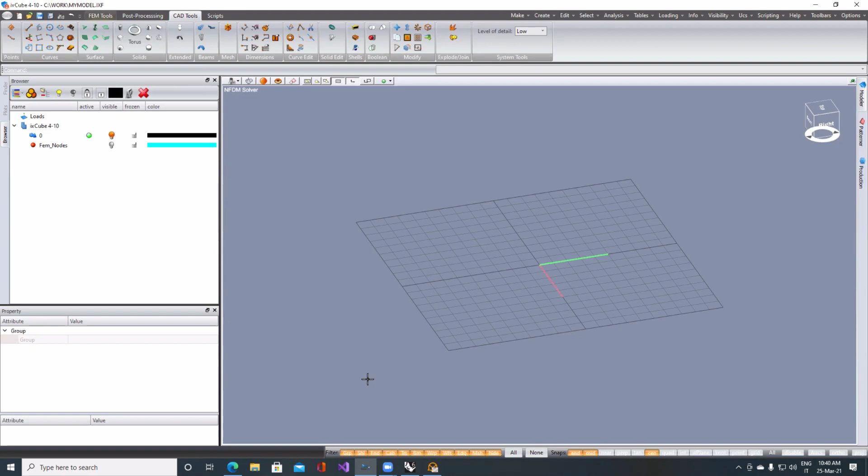I turn back to my Grasshopper. Now, if I run here and I go back to ixCube, you see that the name of the job is C work MYMODEL IXF. Okay. Is that clear? So I am just starting a job. I want to be sure that I start from the same position. This seems a bit stupid, but it's not. When you try to make a really complex thing in Grasshopper and you don't start from the same position, quite often you end up with different models and different results, and you don't know the reason. And the reason is that maybe the environment is different.

Now, let's say that we want to generate a tensile structure from inside Grasshopper. I will not make a parametric one at this moment. I just want to make a simple one, and then we'll see how to make it parametric. It depends on your experience inside Grasshopper, but it's not so difficult. Anyway, the tools that we use to generate tensile structures are all these tools here. We have linear element, mesh element, and point element. What are these elements? Let's start making the mesh. I will start from here. I will make a surface out of these 4 points.

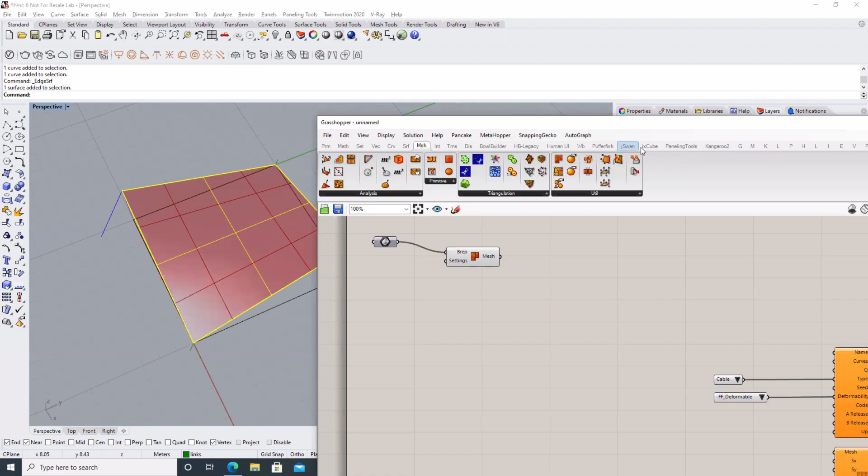Let's hide this. This is my mesh. Clearly, we have options to remesh, to change the settings of the mesh. But inside ixCube, in the tools, we have a remesh tool, the same mesh tool that we have in ixCube. So I want 0.25.

And the mesh. Let's hide this one. And you see that we have again a mesh 0.25 by 0.25. Okay. This is the mesh inside Grasshopper. We want it to become a tensile structure. To do this, we will use the tool mesh set.

What is mesh set? Mesh set is this component here. It wants a mesh as an input. And then we have the prestress in the warp and in the weft direction. The pressure: if we want to make an inflatable, we can apply a pressure, but this I think is a bit obsolete. And then the warp plane. You remember that we have to set a plane for what is warp and what is weft.

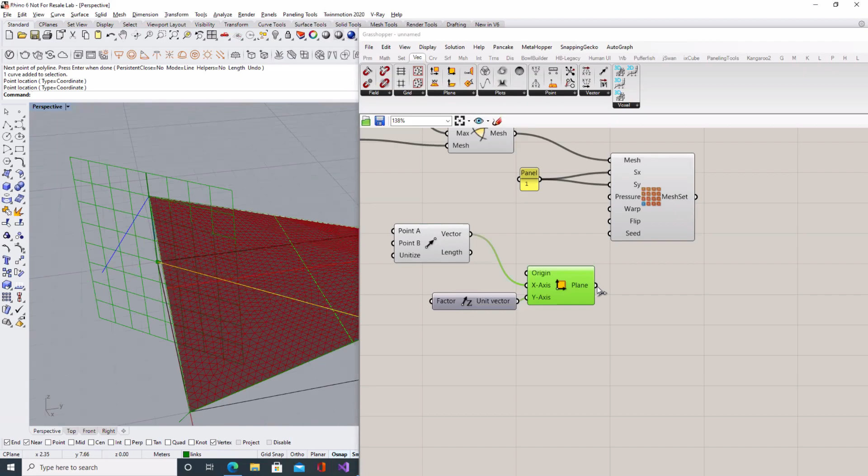Let's go here. We can go into the vector, plane. We can make a construct plane. The origin is okay. The x-axis, there are many ways to do this, but I'm lazy. I'll just draw a line here and say vector two points. This one here, this one here. So this is my x-axis. And my y-axis is simply vector unit z. So you see this plane here, and I input it into the warp plane.

The seed is the material. Remember that for the membrane and for the beams, we need to apply a material, a cross-section. And where do we get it? Well, we go back to ixCube. In the get, we have get seeds. If you get a panel and plug the seeds, these are all the seeds we have defined in the template. And here you understand why it's important to use a template. If I make my own template, I fill it with all the materials and cross sections I want to use. So when I start a project, the seed list is always the same.

Figure out if you make a parametric model with one template, then you go back and use another template. Because now I am going to reference, for example, for the membrane, seed number 6. Think about it: you have made a huge, beautiful project, working for one week on a complex parametric model with all materials, seeds, and so on. And you load a different template where at number 6 you don't have a material, but a cross section or a steel profile, because you have just used a different list. Clearly, you go crazy because nothing works anymore. That's why starting from your own template puts you in a safe place where everything will always work.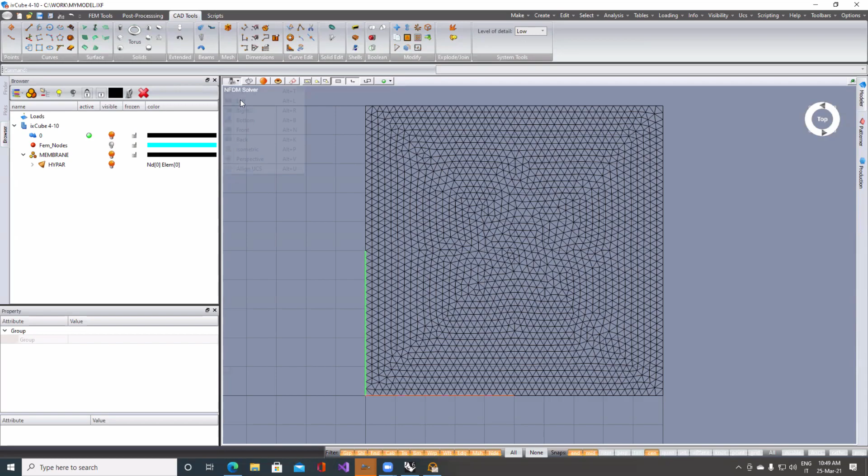That's quite big. If we go back to ixCube, we have generated our mesh. Okay. One thing that I see is that it's flipped. Remember that generally you want the positive side on the top of the membrane, for two reasons. The first one is when we apply loads: the positive load will push the positive side. And then when we generate patterns, the positive side will be the top of the panel. Generally, we pattern looking from top.

So if we go back here, in the flip I will use a Boolean input and set it to true. If I generate the model again, it's working now. You see that the membrane is on the correct side. Okay. Fine, we have generated the membrane. What we want to do now is generate the edges of the mesh.

How can I generate the edges of the mesh? Well, this is a bit more tricky. I would like to make only 4 edges, but this takes a little bit of time. In this moment, I will make all the edges in single pieces. If we go into the mesh tools, we have a deconstruct mesh tool. Oh, sorry, not this one. Mesh edges, sorry. If I plug the mesh into the mesh edges, we see that this tool gives me the naked edges.

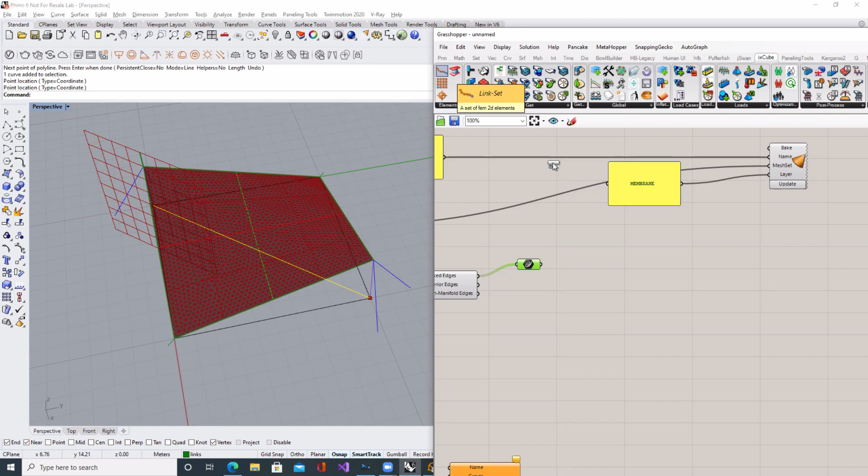So if I plug the naked edges into a curve tool, these are the naked edges, the boundary edges of my mesh. So I am ready to generate the boundary cables. We can go into ixCube again. Now we will use this one here, the link set. The first input wants curves, and these are the boundary of my membrane. Then the Q is the prestress, or the force density value, and I would input here a 20.

The type of the element, we can choose between cable, truss, or beam. These are cable elements. The deformability: these are form-find deformable. Then we have the releases and the up vector. I don't need these because these are cable elements. So we have a link set. We go into generate, and we have here generate a FEM 2D group. We input the link set. The name is edges, and the layer, again, edges. If we click on update, we see that we have generated the edges for the membrane.

What is missing? Clearly, I am generating these objects one by one. But if you want, you can make a button here and connect the button, so when I click on it, it will generate everything in one shot. One thing is missing, and this is the fixed points, the 4 corner points that I need to fix. So how do we generate fixed points? I need the 4 corner points of this membrane.

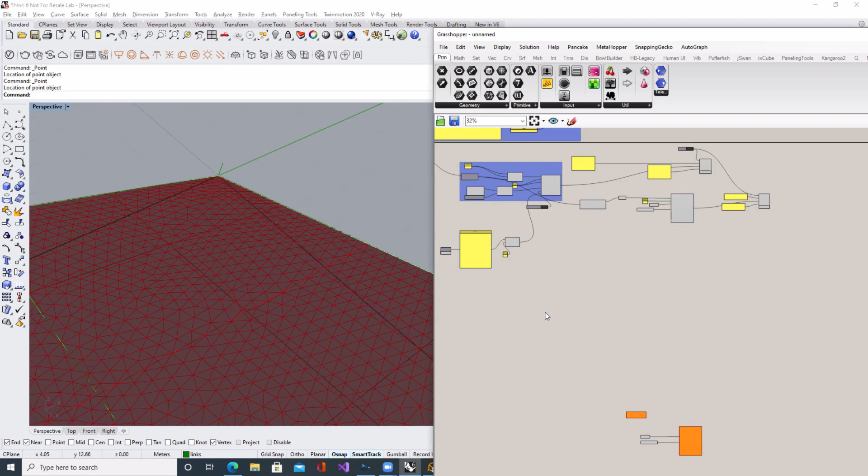Now, there are different ways to detect this. I want to make things simple in this moment. I will draw 4 points. I will go into the tools, set multiple points. Clearly, you can detect these points by your geometry, but I need to go fast in this moment. So I have 4 points here, and these are constrained points. How do we generate this? We go again in ixCube, and we have here a node set. It wants the points, and then a restraint. For the restraint, we have a restraint condition, where you find the 6 degrees of freedom for a point.

So we have generated here 4 constrained points. There is a little difference now because we will generate a node group. A node group is simply an empty group. There's no geometry inside, it has only points, so we can fix these points to constrain the geometry in some place in space. I will just attach the node set and the restraints. We will call this fixed nodes, and these are nodes. I click on update. If we go back here, we have the fixed nodes. We have no geometry in them, but if I go into the FEM tools and unhide the nodes, you'll see that we have 4 fixed nodes at the corner points. Okay.

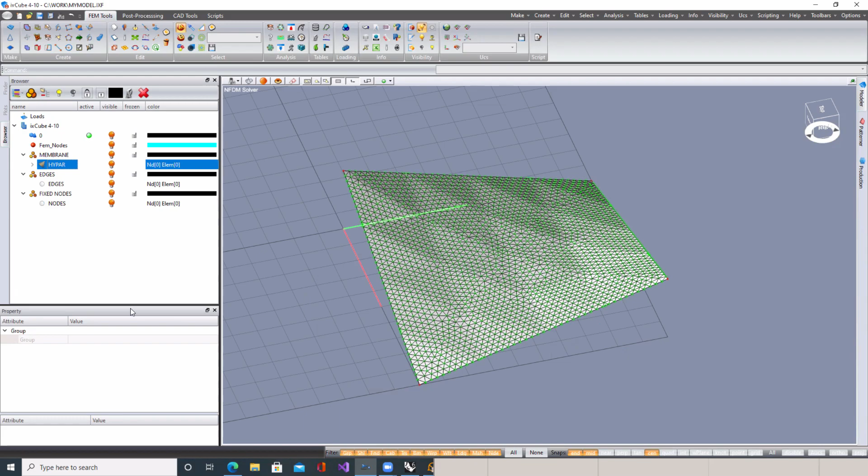I would run the form finder from here. Error in form finding, what's going on? The prestress here. No, that's the protection. The edges. Something wrong with the edges. There's something wrong with the edges. Where is my mistake? I did something wrong here. I think I got the wrong mesh when I generated my edges. Let me see.

Yes, you see, only the naked edges. No. I have used the mesh coming from the B-rep. You see? This is the mesh I have used here. And this is the mesh from the B-rep. I have plugged the first mesh into my edges. I should plug in this one here.

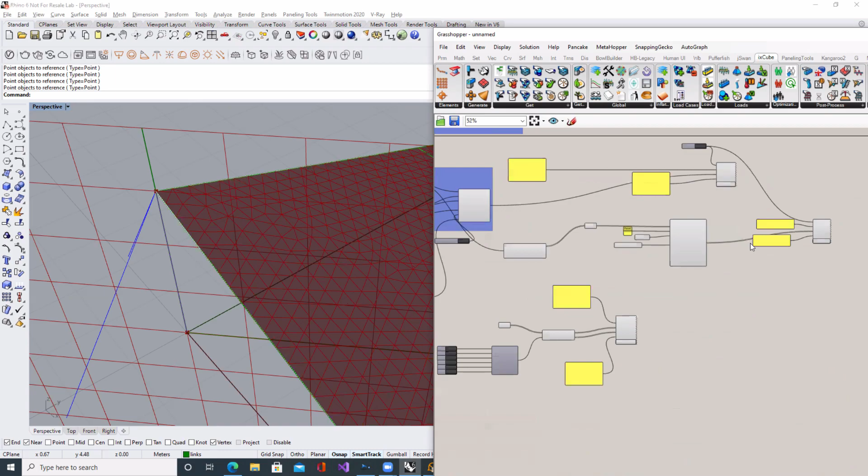So now I can generate my edges again. Got it wrong. What's wrong with you? I will delete this. Let me see. Hey, what's that? Let's make a new group. I don't know what happened. Let's make a new group just to see maybe.

This one you like it. Oh, where is it? I lost my ixCube. The server has crashed. That's why. I have only one session here. Okay, let's do this. I will delete this. I will connect this one here. And I will connect this here. I will go here and I will click on this one.

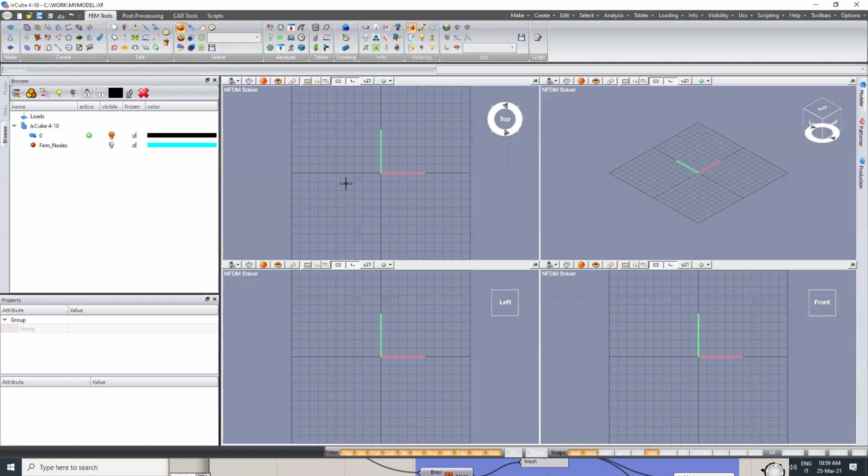So you see, I started from scratch again. And then I will click here to generate the model. Let's see what happens. Let me check my edges. If I hide my membrane, yeah, now they seem to be correct. So we can run the form finder. Yeah. That's it.

Now it's working. The nice thing is that if we go into the global here, we can run the form finder from here. And again, we have the options: number of steps, if it's non-linear, and so on. So you can just run the form finder. It's telling you it's form finding now. And the form finder has converged with success. Okay.

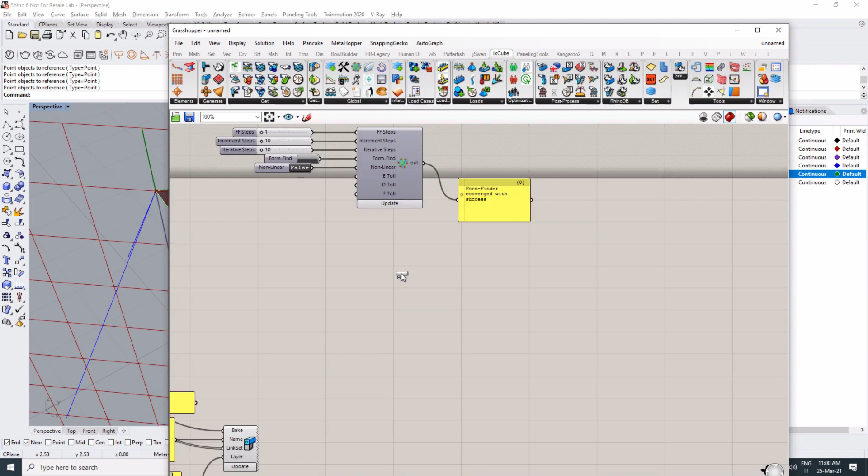Once you have run the form finder, we can open a window from inside Grasshopper. So basically, once you learn all these tools, there's no need to leave Grasshopper. This is a window inside Grasshopper. And we can also make window settings. We can plot, for example, response form finding. We want to look at the membrane stresses. We go into membrane here and look at membrane stresses like that. Okay.

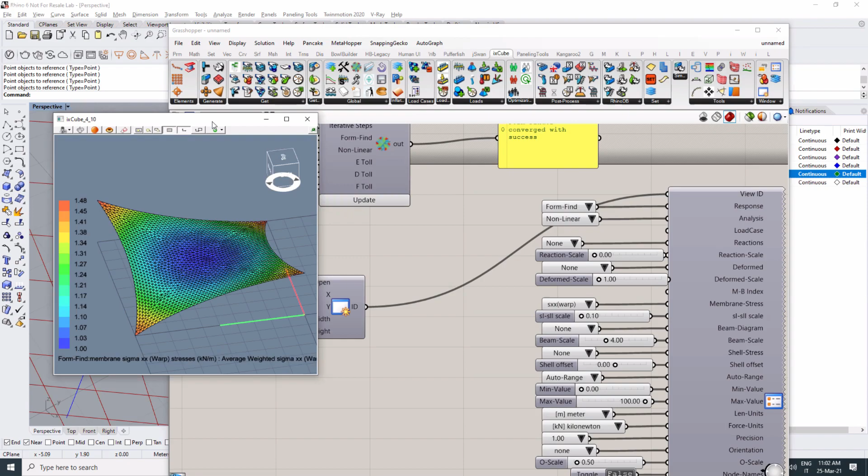So basically, this will take a little bit of time, but using Grasshopper, the nice thing is that we can merge all these tools with all the parametric tools we have inside Grasshopper. So we can generate parametric models and on the fly generate a tensile structure and check if it's working. It will take a little more time to grasp these tools, but if you're a Grasshopper user, I think it's quite easy

to understand these things. A nice thing that we have here, if you go into post process, and this tool here, check elements, we can recall from here the profile and the material explorer. So if one of these profiles is missing, you can generate one of these profiles or seeds, and you just click OK. For example, I want to get a 219 millimeter into my model. So I add these seeds to the model. Okay. And then I go back to my seeds. We update, and we have these new profiles in the seed list.

I know, really a lot of information today. So what I suggest for you: try to make an inflated cushion just to understand the feature we were talking about, cushions, and then try to make a hypar using Grasshopper, just what we have done here. Okay. Any questions?

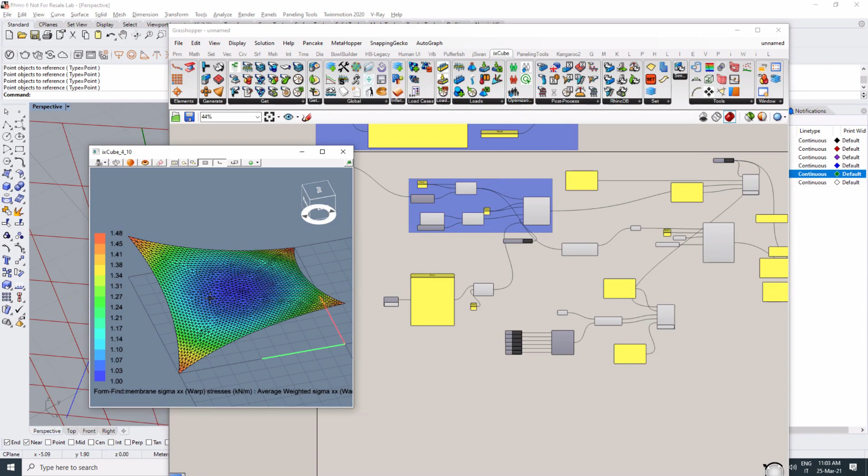You got scared? No. You know Grasshopper. Everybody now knows Grasshopper, no? You've never seen Grasshopper? Nobody. I don't hear anybody else ever use it.

If you go onto the Grasshopper website, onto the Rhino, you'll find a huge amount of stuff to learn the basics of Grasshopper. But for anybody in the field of architecture and engineering, it's very easy to grasp. We have vectors, points, surfaces, curves. So all things that we know very well. And then we have these black boxes that are just inputs and outputs. So after a few days, you'll find yourself going on quite well.

One thing is that it needs good planning. Now, you see me, I have made a bit of a messy job here. But if you plan nicely, in a careful way, you're able to do amazing things. Okay.

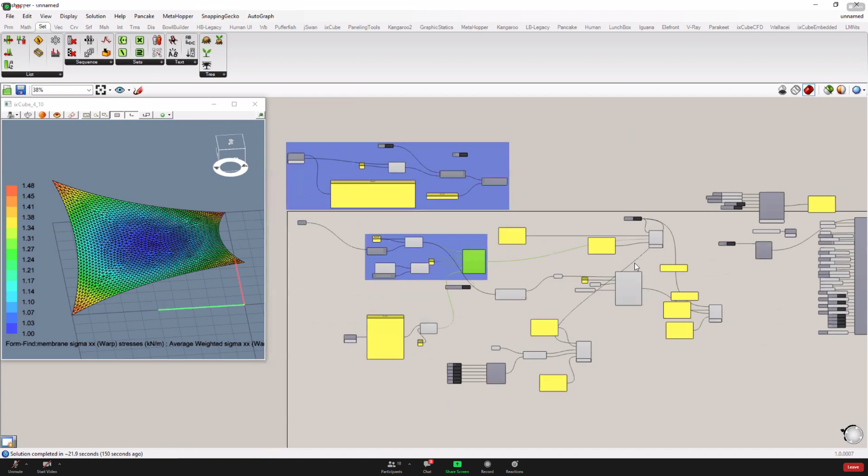No. Yeah, but how can we do it? We have seen here, for example, that if I put all these options together, we can generate a model. If I go here and I connect this one to this one here, as soon as I click run, he generates the model. Okay. Now think about it. You have a tool. We're changing parameters. We can generate the model out of a number of parameters.

There's no optimization tool inside ixCube. ixCube's role is to run an analysis and give you a response. If I go here into the ixCube tool, for example, we have post-processing where I can get all the information about stresses, forces, energy, whatever you want. Using the Grasshopper tools, Grasshopper has different optimization tools. For example, Galapagos, where you can optimize.

So basically, this is your scenario. I have my input parameters, then I generate a model, I generate the analysis, and I get some output parameters. And I want to optimize these parameters here. So you can generate out of Galapagos a number of scenarios in batch mode. You get these parameters, and he generates a number of different scenarios. You get the best ones, and that's your kind of optimization. All the optimizations work like this.

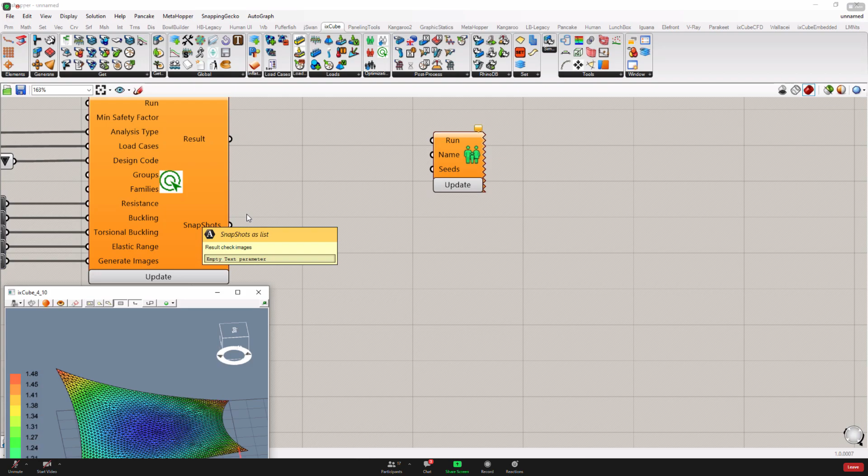Inside Grasshopper, we can make something much more complex, but it takes time. You need to know where to put your hands before doing something like that. I'm just curious about the optimization in ixCube; you said it's about the family of the elements or the material. It is for making an optimization of the profile, because it's highly related to making a real job. Now, let me open a file here. I can show you.

You see here, you have a lot of steel. Yes. When you're making a real job, one of the goals is to optimize the steel, because if you save weight, you save a huge amount of money. So you want to make it as light as possible. Here we have a lot of load cases, and we want to be sure that the profile passes all these analyses and find the best profile for all these load cases. So it's a profile optimization.

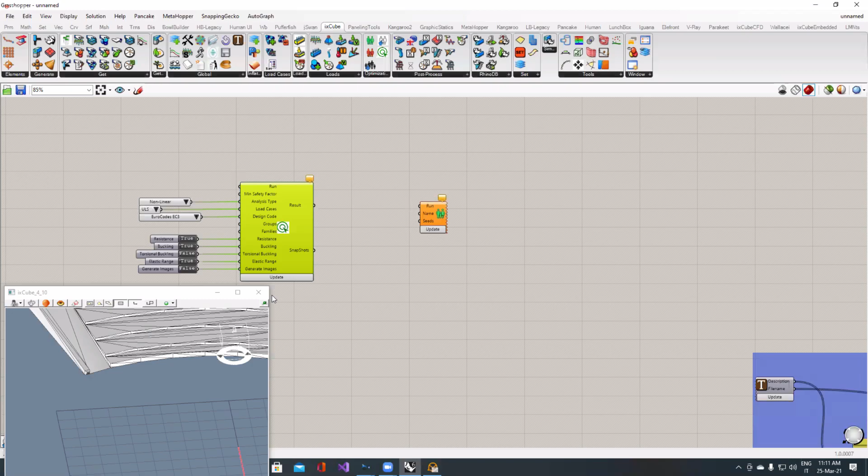It depends on what the optimization can be. Yes, tell me. This is a hierarchy of the scenario we had in mind. We first optimize the geometry, for example based on the nodes, and then use this optimization to find the best material. Exactly. Here in Grasshopper, you make a geometrical topology optimization. You find the best shape for the project. After that, the final optimization would be the amount of steel, the weight of the steel, and the amount of material. Okay. Thank you for the clarification. You're welcome.